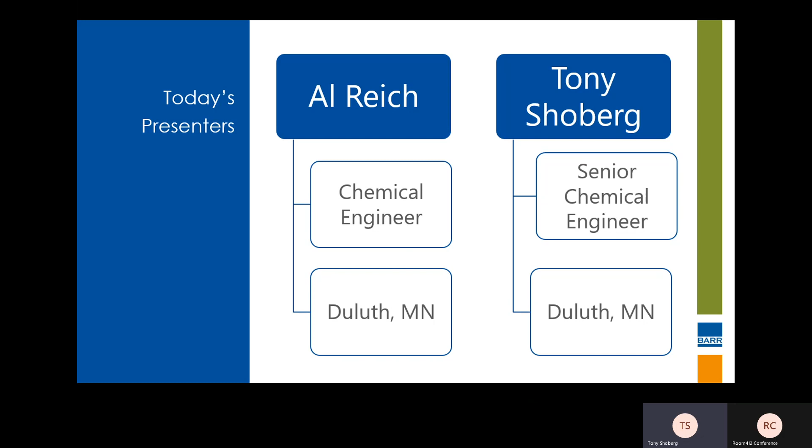Hey everybody, I've got a really similar story to Al, except I've been at it a few more years than he has. So looking forward to talking to you about tanks this afternoon.

Great, so enough about us. Since we've got a smaller group, I think it would be great if we could just do a quick round the horn of: what type of facilities do you work at? What type of experience do you have with tanks and air quality? Are you responsible for emission calculations? Do you have any specific items you're particularly curious in, just so we can kind of keep the boat pointed in a useful direction for everyone? Maybe we can work from this direction over.

Okay. Sure. Okay, awesome. Okay. All right, me too. Gary? Right, in the back? Okay, Kale says hi. Okay, and you sir, in the almost front row, quick intro, what are you involved in with air quality efforts with storage tanks, emission calculations, anything in general?

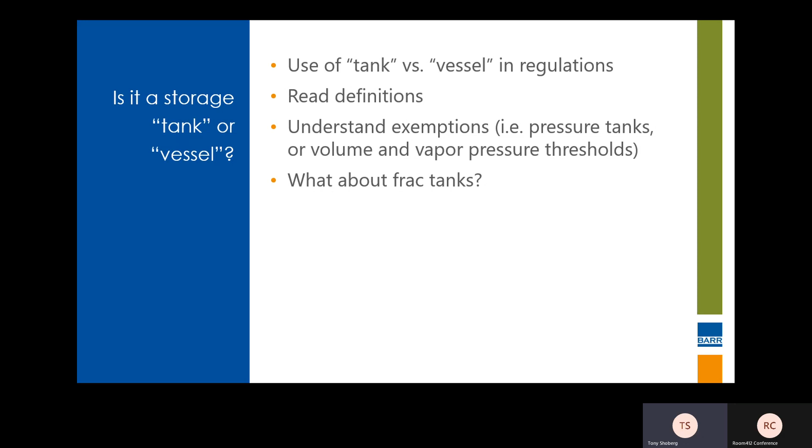I think one takeaway from here is the NSPS rules, particularly K, KA, and KB, universally apply, or potentially universally apply, regardless of what industry you're in. So that's going to be our focus when we're going through the regulations here. We're going to be talking a lot about KB, and the main thing to note is that some of these tangential or similar regulations are very similar with some slight differences, or they might refer to KB. So just something to keep in mind there. And Al, feel free to add anything as I'm going through as well.

You got it, Tony. Ready for the next slide.

So as I said, this goes into a little bit more detail about the common air regulations. So K, KA, and most importantly KB for volatile organic liquid storage, is one of the most common ones that we all have to deal with.

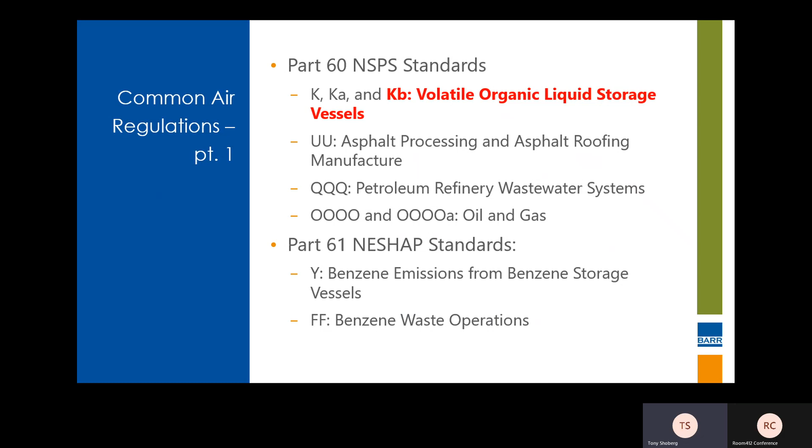Then on top of that, there's state regulations, and we just have tried to give a couple examples. This obviously is not an exhaustive list, but Illinois, for example, has Part 215 that applies to loading operations and storage operations. There's a separate Part 218 that applies specifically to the Chicago area. There's some other examples here. So the main point is, don't forget about your state regulations.

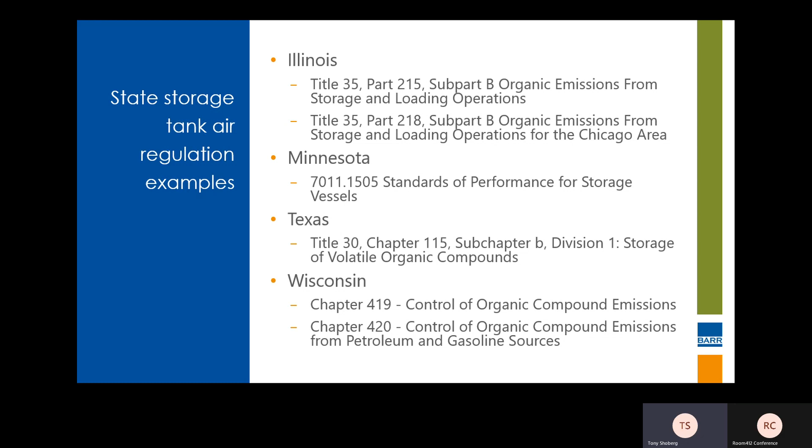So the structure of air regulations follows somewhat of a common pattern, where there's the applicability, definitions, and exemptions, which we talked about a little bit already, and it's important to go through those. Sometimes it's pretty obvious what you're subject to, but other times it's not, and it takes a more detailed look at the requirements. And then there's your actual standards, which might involve work practices, such as inspections, or if you have a fixed roof tank, it could be an actual emission limitation. Typically for floating roofs, those standards are work practices and not actually numerical emission limits.

Testing may be required. Inspections, again, might fall under that testing category. Monitoring of your operations to ensure that you're meeting any required standards, and of course record keeping. If you don't have records, then you basically didn't do it. And in some cases reporting is required. So most regulations have some element of each of those topics.

Starting out basic here, we'll get into some of the details. So KB applies to storage tanks that are constructed, modified, or reconstructed after July 23rd, 1984, and that have capacities greater than roughly 20,000 gallons.

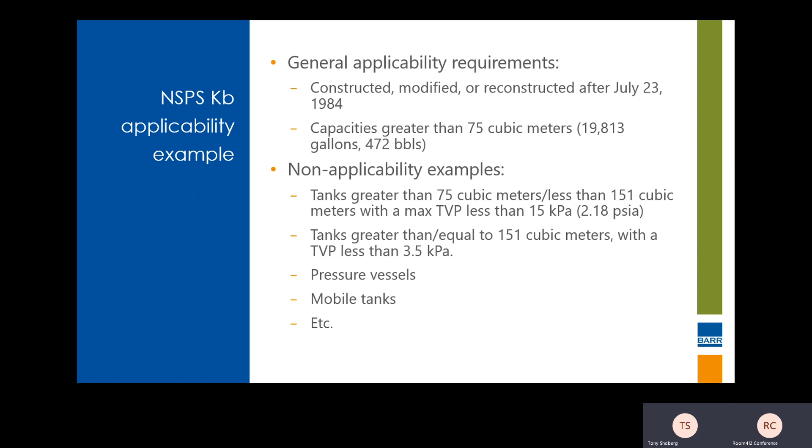Typically under KB and other rules, if you have a maximum true vapor pressure of greater than 11.1, that's going to require use of a closed vent system and controls. So that's usually the limit we're looking at for being able to store volatile organic liquids in a floating roof tank versus something that needs to be connected to a closed vent system and emission controls.

As far as I know, I haven't seen a floating roof tank successfully connected to a closed vent system and control system. I don't know if anybody in the room has experience with that kind of configuration, but there's some technical feasibility issues that typically preclude that combination from being used. There was a note that there might be one in Louisiana somewhere, but I think it generally seems to be uncommon. Yep.

Gary is noting that it may have come up through a LAER evaluation, which would make sense since it's typically uncommon. Yep, that makes sense.

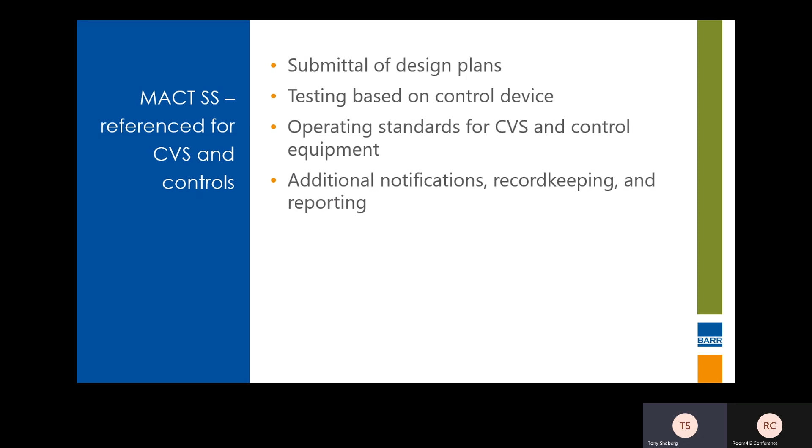So outside of actual regulations, there may be requirements for your storage tanks, such as from air permits. If you don't actually have a permit document, it might be like in Texas and some other states, a permit by rule or a general permit, where the permitting and rule are kind of combined into one thing.

Another source of tank requirements can be the Storage Tank Emission Reduction Partnership Program, also known as STERPP, which was a voluntary agreement, I believe, back in the early 2000s for operators with the EPA to reduce air emissions, primarily from slotted guide poles. They incorporated requirements there that are very similar from MACT WW. So basically what STERPP requires is no visible gaps on your slotted guide pole, and provides some very specific options for what controls you can use to meet this emission reduction program.

I'll pause there. Any questions or comments up till now?

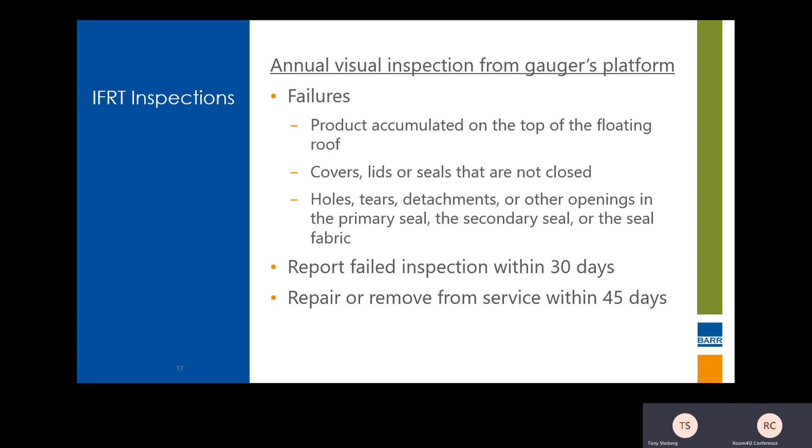This is another one where this complete out of service inspection might have some misunderstanding - I think we'll go into that in more detail later - but maintenance might think they're doing the inspection in accordance with API 653 and that they're covering everything they need to.

For this complete out of service inspection, more often, or almost always, it doesn't check all the boxes, so it typically is its own independent inspection. Under KB, the rule says it must be conducted out of service, but there recently was some language that allows you to request an alternative monitoring procedure. I think it's actually written into the rule now. I don't know if you actually have to request it, Al.

This slide is a precursor to the upcoming more detailed NSPS alternative compliance option. Historically, to request the AMP, for a while the EPA was granting them, and then they kind of pumped the brakes on it. But recently, early this year, the EPA published the final update to NSPS KB that has provisions to accept MACT WW as an alternative compliance option, and we'll touch on that in more detail as well.

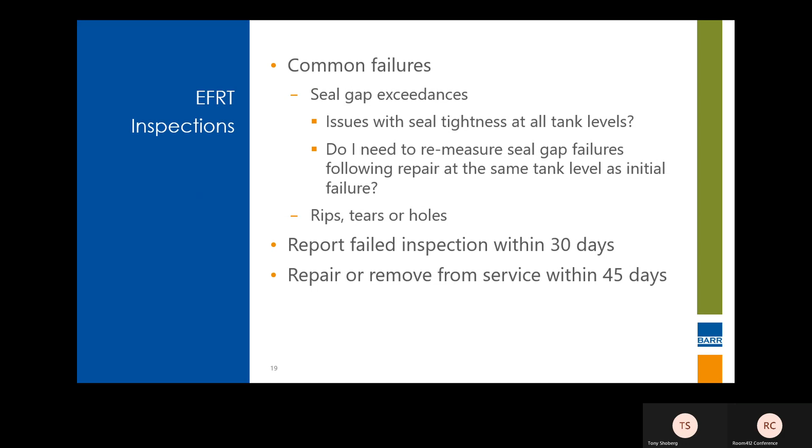Talked about this one already - it's pretty much the same as the IFRT, except that this inspection is required each time the vessel is emptied and degassed, not on a 10-year cycle.

You can go to the next slide.

So what happens if I change service in a tank to a product that is less than the applicability threshold to require inspections? For example, you have a floating roof tank storing gasoline, but you switch it over to diesel, which wouldn't trigger the vapor pressure threshold for KB applicability. However, if your permit still requires you to do it - if your permit incorporates the requirements of KB, not just by reference but the specific language from there - you must still do the inspections as if you were subject to the rule, regardless of the applicability.

If you no longer intend to store gasoline, you may need to do a permit action to remove that KB applicability - again, it all depends on what kind of permit you have. If it's a temporary event, you could continue the inspections as if you were subject to the rule. And if you don't have a permit and you no longer meet the applicability criteria, you may choose not to complete the inspections. It's kind of a risk-based decision, one of those gray areas, but if there's no underlying permit requirement and you don't meet the applicability criteria, it's probably pretty safe to no longer do those.

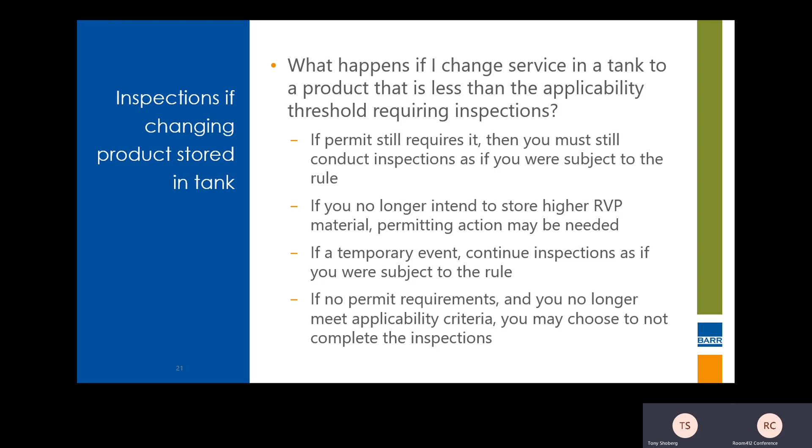All right, seems like a good spot for a quick pause. Questions, comments before we get into monitoring and record keeping? Appears to be nothing on the inspections at this time, Tony.

All right. So some of the basic monitoring requirements in record keeping.

One is you need to have a record showing the dimension of the storage vessel and an analysis showing the capacity, routine records of the material stored, the period of storage, and the maximum true vapor pressure during those respective storage periods. And there is a notification requirement under KB within 30 days if your maximum true vapor pressure exceeds the range that you're subject to.

So there's a variety of ways that you can determine your vapor pressure from your storage tanks. Do you have a question? Yeah, I was making sure I wasn't on mute there.

There was a note around exceeding the vapor pressure ranges, and that's in reference to not necessarily the 11.1 PSI threshold, which would be a deviation under most permit situations. However, this is specifically referring to the vapor pressure threshold range for those smaller, unique applicability categories. Yeah, the 0.5 to 3 point or point whatever. Yep.

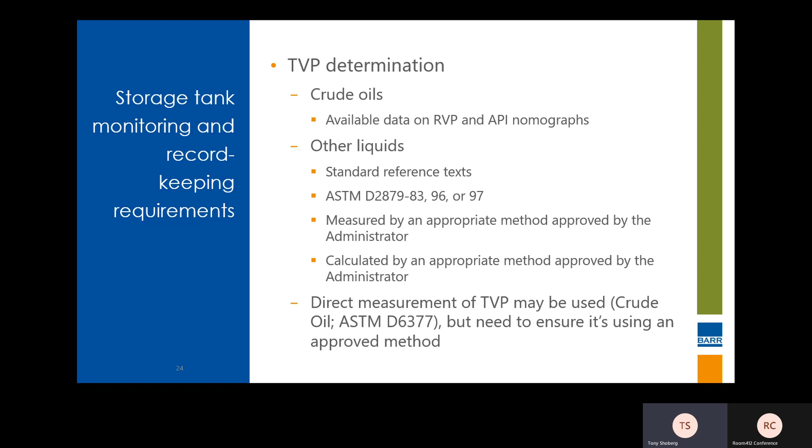If your maximum true vapor pressure is greater than 11.1, you need a closed vent system and control device. So a couple questions we've received: what if your TVP exceeds 11.1 for one day? For example, maybe you received stock that was warmer than normal, or some other extenuating circumstance resulted in your calculated TVP exceeding that. Our recommendation is to calculate a weighted average based on a weighted average TVP, and keep monitoring, but it's not necessarily a KB deviation unless the monthly average exceeds 11.1.

That's from a KB interpretation perspective, but some state or permit requirements may differ. So what if it exceeds 11.1 for an entire month? If it's a one-time exceedance, you may not have to install a closed vent system and control device, but it could be a Title V operating permit reportable deviation. However, if you expect that to continue, you probably will need to install that closed vent system and control device.

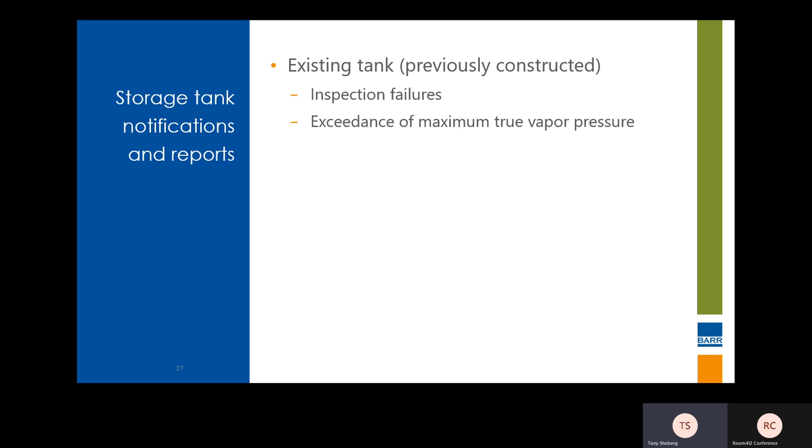For EFRs, seal gap inspection notification, seal gap inspection report. For IFRs, 30 days prior to fill, prior to your complete inspection, actual startup and certification for both. There's an actual startup and a certification that your control equipment meets the standards that's required 15 days after.

And then in some cases, if your permit requires it, you may need to submit notifications of changes to as-built information. And then, of course, there may be some state requirements that you need to consider as well.

If you have a modified tank or a reconstructed tank - and just as a reminder, modified is if you increase emissions on your tank, basically what it comes down to. And then a reconstructed tank is, regardless of emissions, did you spend 50% or more of what it would cost to construct a comparable new tank?

So if you triggered KB for one of those reasons, there's a reconstruction notification, which is required 30 days after reconstruction commences, a modification notification, which is 60 days or as soon as practicable before the change is commenced. So that's very vague.

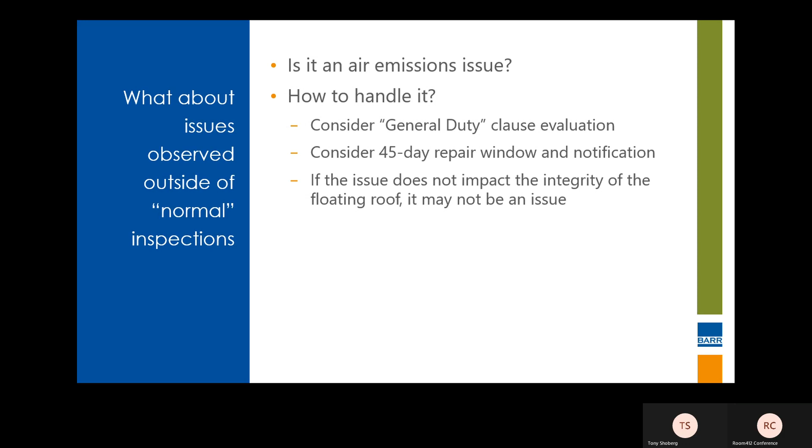Anybody in the audience have any thoughts on this one? Or perhaps you have a friend who has a terminal or a tank. Seems to be heads nodding, but no comments at the moment. Okay.

So just a couple notes about some additional tank regulatory programs. We touched on this previously. The benzene waste operation NESHAP under Part 61 may require a closed vent system and control, or NSPS KB level controls.

MACT CC for petroleum refineries gives you the option of WW or NSPS KB, and it specifically outlines what to do in each case. And then MACT 6B, which is the area source MACT for terminals, is again either KB or MACT WW.

Am I still going on this one? Yeah, you will. We'll just do one final check on the regulatory topics that we've covered. Any thoughts, comments, discussion before we kind of shift gears into a little bit more visual storage tank design coverage here?

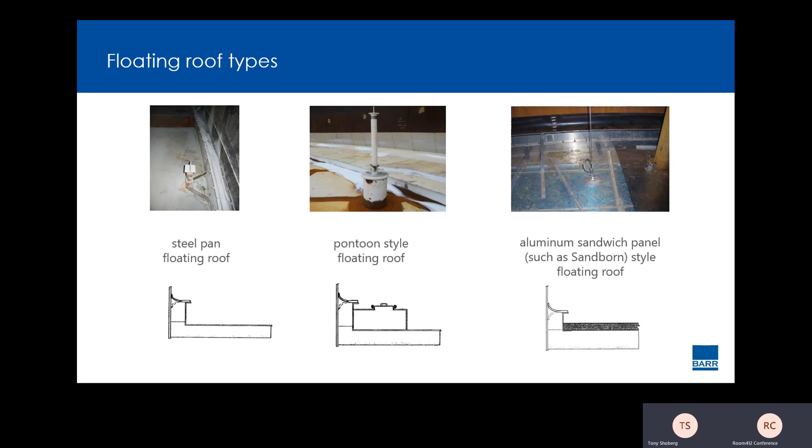Another common one for internal floating roofs is this aluminum skin and pontoon floating roof. So pontoons more in the sense of what you see on a pontoon boat. And so the liquid in this case is not in contact with the bottom of the floating roof, which is a distinction between other floating roof styles.

So there's always a vapor space between the liquid and the floating roof, whereas in the other ones we looked at, you can see in the middle diagram, the middle bottom, there's a line where it shows the liquid level under the seal, and you can see it's above the bottom of the floating roof. So the roof, well, the weight of the roof will push that level up, and it's always floating in contact with it.

So all this is important because these are parameters that go into emission calculations and/or have regulatory requirements associated with them.

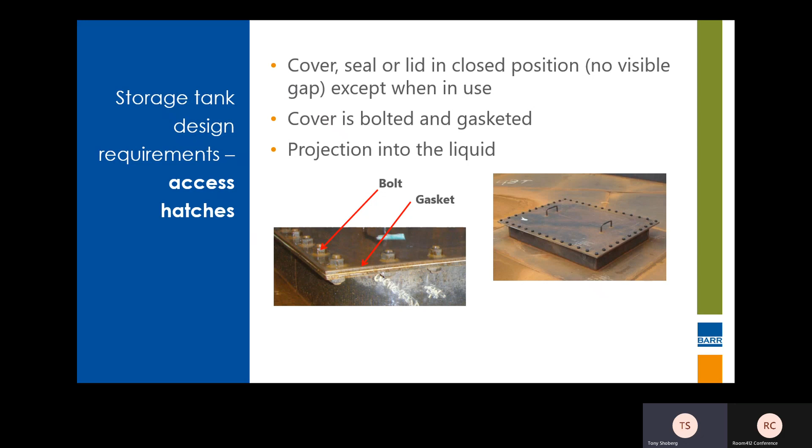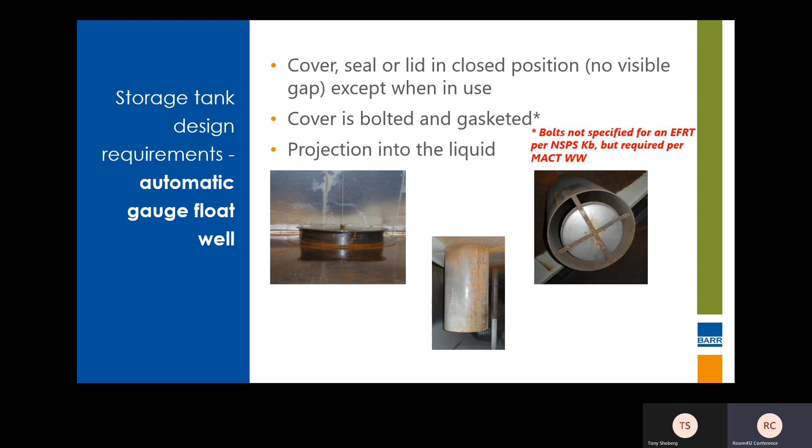Gauge hatches are used to take samples or do a bottom survey, for example. Again, same requirement to have that cover, lid, or seal in the closed position with no visible gap, except when you're using it, and that cover needs to be gasketed. In this case, you can see the gasket on the lid itself and also on that flange that connects the top part to the pipe that goes through the roof.

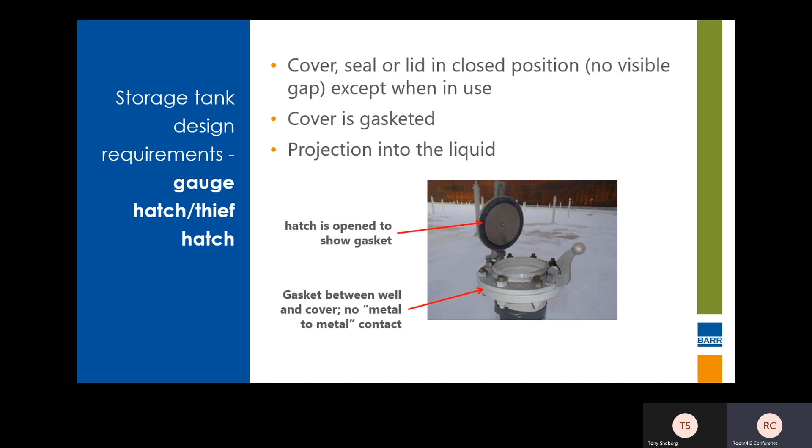Ladder wells are on fixed roof tanks, and again require a gasketed cover. Typically there's a wiper or some other piece of rubber there where that arrow is pointing to show that there's no visible gap. Sometimes the one leg of that ladder will also serve as a slotted guide pole. So they make these sleeves specific for ladder wells to meet the control requirements for a slotted guide pole or gauge pole.

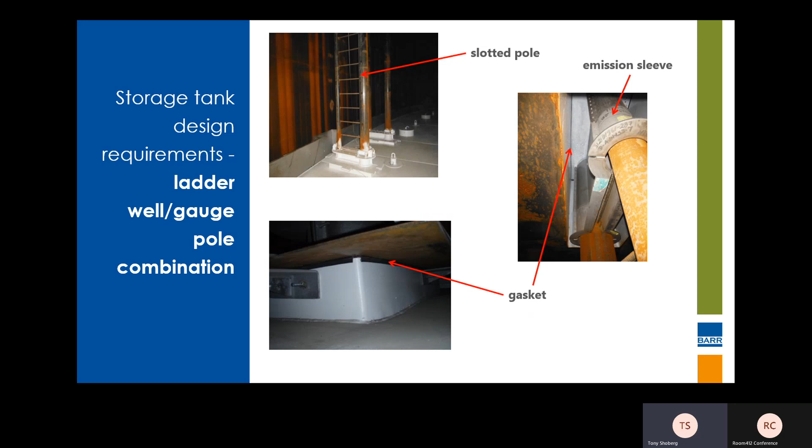Again, just some additional photos here of the gasket. Notably in that one lower left photo, you might argue that there's a bit of a gap between where the gasket comes together in the corner. Oh shoot, the projector isn't super great, so it's a little bit difficult to tell from the back. But as Tony's pointing out, we've mentioned the 1/8 inch gap provisions generally when we're talking about the other inspections, and I'd say that could be one to cause concern.

Sorry to take away somebody's opportunity for the bonus point. Let's go to the next slide here.

Rim vents are used to relieve the pressure between the seal and the roof. These are typically seen on older tanks; I don't see them specified or installed on newer tanks anymore. It gets a little tricky because some use a weighted pallet vacuum and pressure type configuration, shown in the lower right, so it's hard to tell whether it's gasketed or not. Sometimes you've got to look at vendor drawings or take it apart while the tank is out of service to verify compliance. So a lot of times they're just cutting these off and welding a patch over them instead of leaving them on.

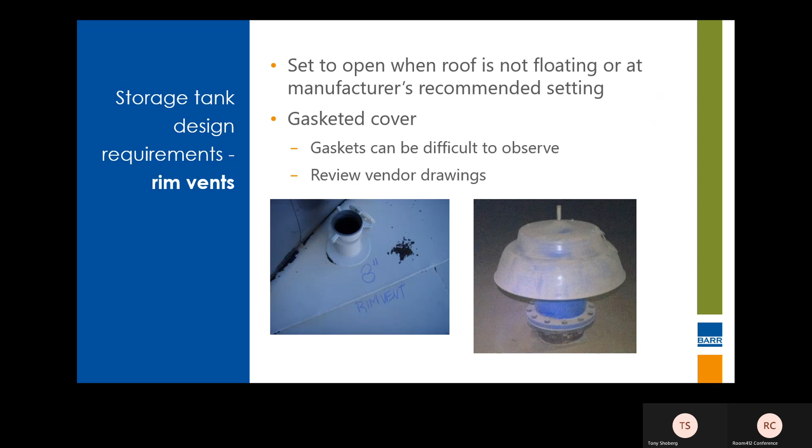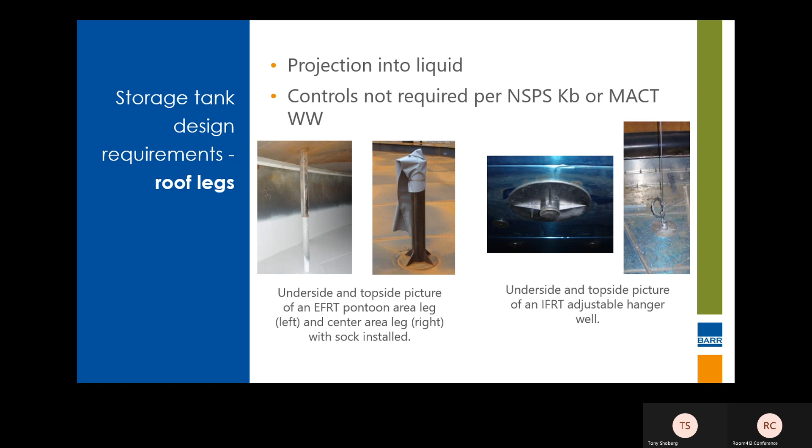So for a slotted guide pole, gauge pole, or anti-rotation pole, regardless of what function it serves, it requires a cover, seal, or lid in the closed position with no visible gap, and a wiper, either a sleeve or float. The cover needs to be gasketed. It has to have a projection in the liquid. It has to have a cover or cap on the top of the pole, way up at the gauger's platform, and often that is some kind of automatic gauge, like a radar gauge. If not, then there just needs to be some other kind of cap. It just can't be open.

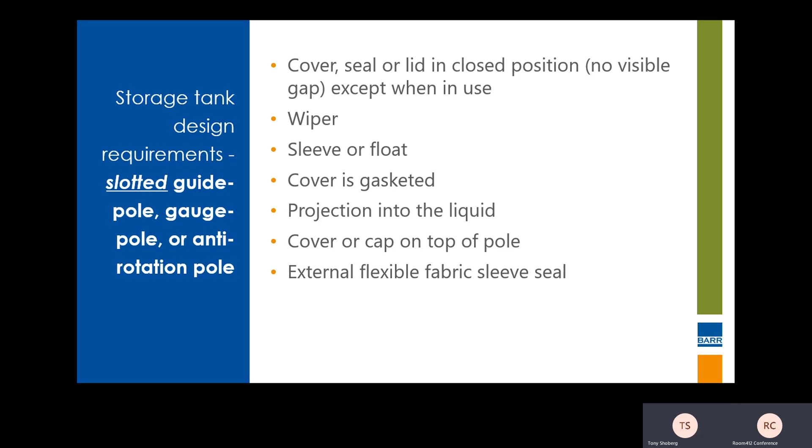I think this is just another up close picture of a wiper and a gasket and a slot, which in this case is a hole.

One thing to keep in mind if you're out inspecting a tank is that sometimes there might be holes or slots only below the floating roof, but then above the floating roof, there aren't any. So as long as they're not above the floating roof, that typically can be considered a solid gauge pole and not a slotted one. With the note that you should be cautious or conscious of your high and low leg settings to ensure that you don't look good from the inspection perspective, but then on your working bottoms have potential slot issues to deal with.

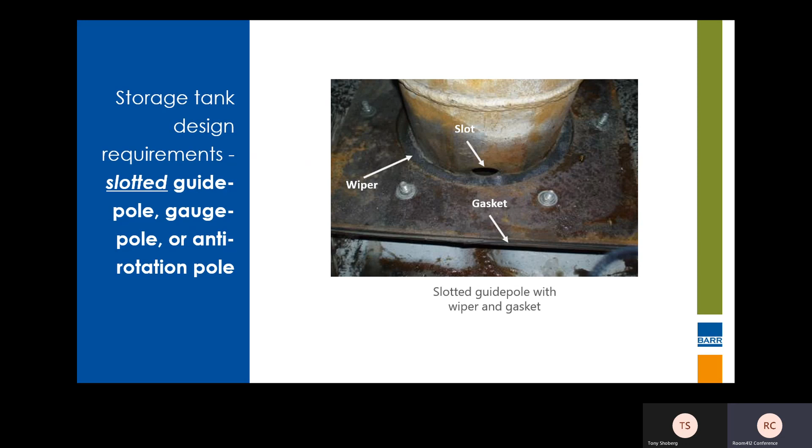Correct, yep. So to Tony's point, if for whatever reason your vendor started drilling holes, or they find that there's some benefit to having a few holes, you can still be an unslotted pole if you have holes in your pole. But if they can potentially be above your floating roof in operation, that's where we run into problems. Not problems, but it's just a slotted pole.

So stub drains are utilized on internal floating roofs for the purposes of, if you unintentionally get product on the top of your roof, there's several of these drilled throughout the tank. The little ping pong ball will float up and the liquid will go back into the tank instead of being on the floating roof.

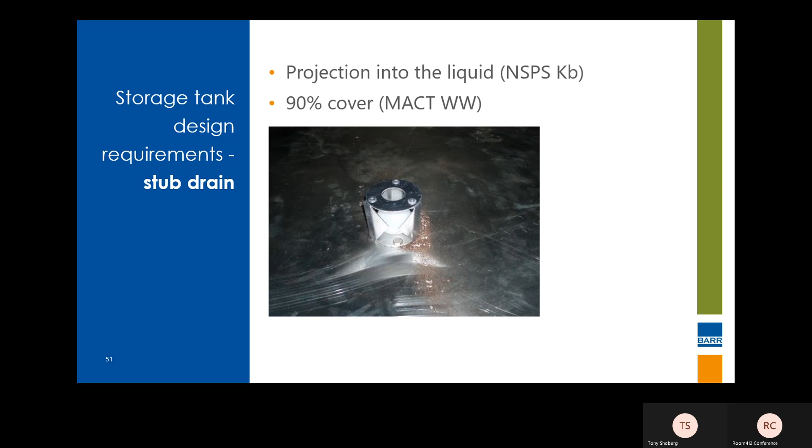I can take over from here, now that you've got through the visual portion of the presentation here. Sounds good. All right, so we've just covered the general overview of floating roof design, deck fitting requirements, and general floating roof parameters.

What are we going to do with them? Why are they important? What do we need to do with those? It's important for a variety of reasons to approach this from a significant data management perspective, because we want to have accurate representations of what our tanks are designed as, how they're built or constructed, and what's on them - not just from the emission calculation perspective that we'll get into in a bit, but also more directly from the regulatory compliance perspective.

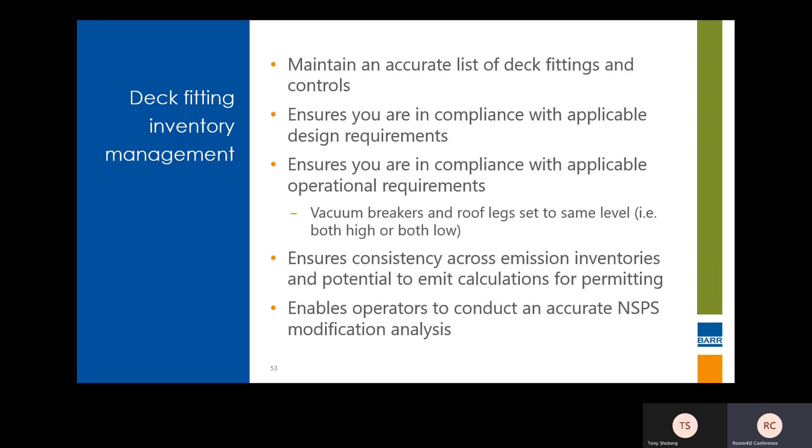So that to be said, we've covered the floating roof deck fittings in significant detail. Now we'll look at storage tank compliance requirements for fixed roof tanks with closed vent systems. Not a lot to cover here - we're going to keep it focused on storage tanks, but we don't want to miss discussing the fact that these closed vent systems are designed to collect the vapors and gases being emitted from those tanks and route them to a control device, preventing them from escaping to the atmosphere before they get combusted.

And from the NSPS KB perspective, we want to have no detectable leaks above 500 ppm and look for a VOC reduction of 95% or greater for whatever type of control device you're using at the tail end of that closed vent system.

So then we've talked about design requirements. We'll get to storage tank operational requirements here to talk about some additional elements from NSPS KB as it relates to these storage tanks.

One of the big questions that comes up quite often is the rule states the process of filling, emptying, or refilling shall be continuous and shall be accomplished as rapidly as possible. Unlike other regulatory definitions, we don't have a lot of clarity or specific guidance on what that means. So a common question is, what does continuous mean?

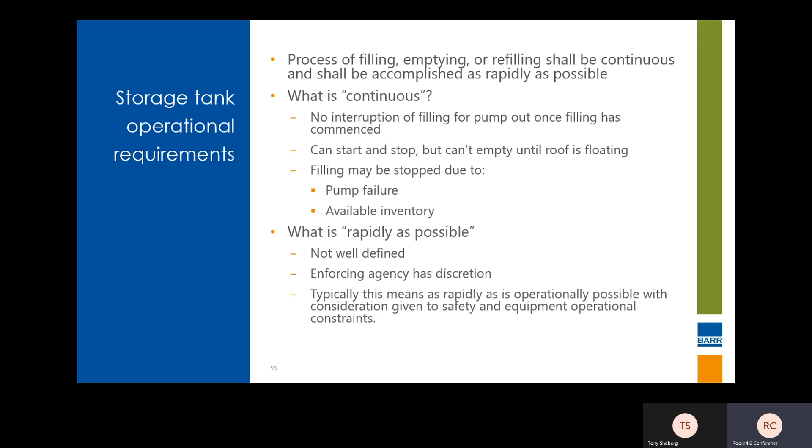Yeah, if you had to trickle fill it, I would argue that you may want to, from a filling perspective, evaluate if you can batch it to a slightly more tighter time frame. But essentially, you have to account for your emissions and do it in a way that you can defend as being continuous and rapid.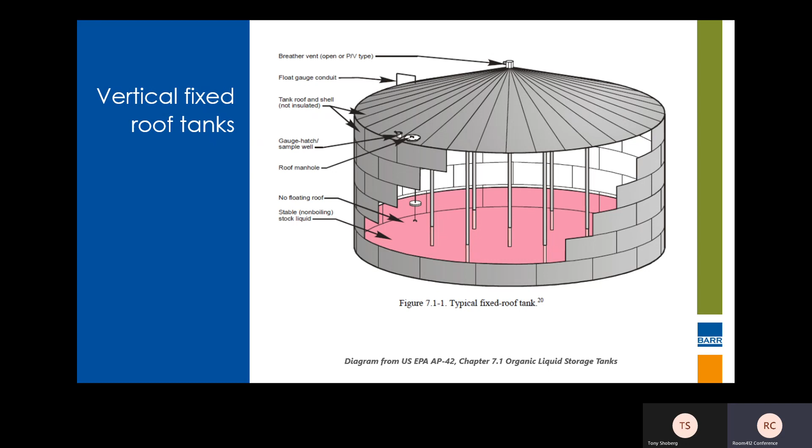For the floating roof tanks, unlike the fixed roof tanks where we have just a function of liquid going into the tank and being in the tank, our floating roof tank emissions are driven by a number of sources. We have impacts from the rim seal, impacts from the deck fittings, potentially impacts from the floating roof itself if it's not welded, in addition to the withdrawal losses as that roof moves up and down.

And then, of course, we haven't fully distinguished between an internal versus an external floating roof tank, but as Tony noted earlier on, the internal floating roof tank type simply is a combination fixed roof and floating roof, and that fixed roof eliminates the wind effects and therefore can theoretically result in a tank that has lower emissions than an external floating roof tank.

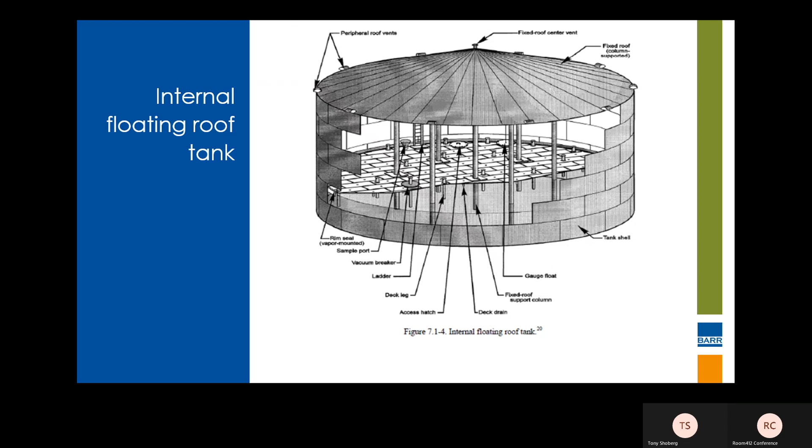So from an emission calculation perspective, there's sort of a general hierarchy or perhaps path to get to where we are today. If you want to refer to it as primary sources of the calculations we are most familiar with, it started back in the API MPMS, Manual of Petroleum Measurement Standards, Chapter 19, and this has all of the nitty-gritty background details in terms of where these calculations were derived from, the empirical data and all that.

Unfortunately, they're not publicly available. They're not super expensive, but they're sometimes a challenge to get, especially if you're just trying to find one tiny piece of information. To that point, they have been used as one of the primary developmental tools to get us to Chapter 7, Section 7.1, Organic Liquid Storage Tanks, in the EPA's free and widely available AP 42 guidance document for emission calculations. And so a lot of what is in AP 42 is simply distilled down from the API MPMS documents and publicly available, and what all of our regulators use and what we use to play ball with for the most part in terms of emission calculations. It's the official reference source of tank calculations by most agencies, and it's really what the states and EPA expect to see when we're talking about tank emission calculations.

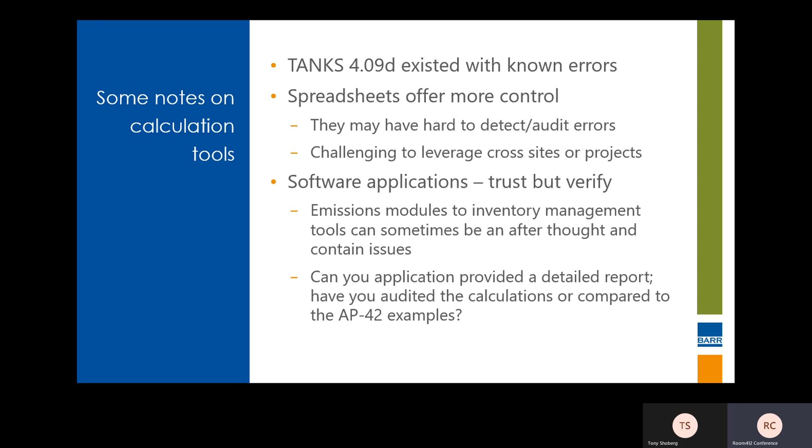If you're not able to easily answer those, that can be a bit of a concern. In AP 42 itself, they say you can use spreadsheets or software applications, but make sure you trust, test, and verify them, because we're not going to certify or approve anything. I'd be cautious if anybody says they have an EPA certified or approved tool, because effectively there shouldn't be or isn't one. Not to say it's not correct, but something to be aware of. So again, can you work examples by hand and get comparable answers? Just some notes on calculations.

So again, we're talking specifically about AP 42, chapter 7.1. We want to use tools that accurately apply the equations, whether it's a spreadsheet or a program. The updates were published, if you've been following along, initially in November of 2019, and then there was a final publication in June of 2020, which really just incorporated a few administrative clerical updates, not anything of technical substance. That was really captured mostly in the 2019 update.

This included a lot of changes to the temperature equations, for our liquid surface temperature and our bulk liquid temperature. That's really where the most substantial change occurred, in how those equations went from assuming a shell height over diameter ratio to a tank-specific shell height over diameter ratio, which is good because it's more accurate and there's some advantage to it, but it also creates added complexity in the calculation methodology. If you're doing it by hand, you run into making sure you've organized your calculations and aligned them correctly with the type of tank you have for the emissions you're trying to calculate.

The other challenging bottom line is the change to AP 42, the pile of new equations, doesn't appreciably change the bottom line. I think we see, give or take, about 5% one way or another in emissions change, which is not nothing, but it's also not typically enough to put somebody in a different source category. But it's also just enough to be substantial enough where we have to go through the effort of making sure we've got our numbers accurate and calculated correctly.

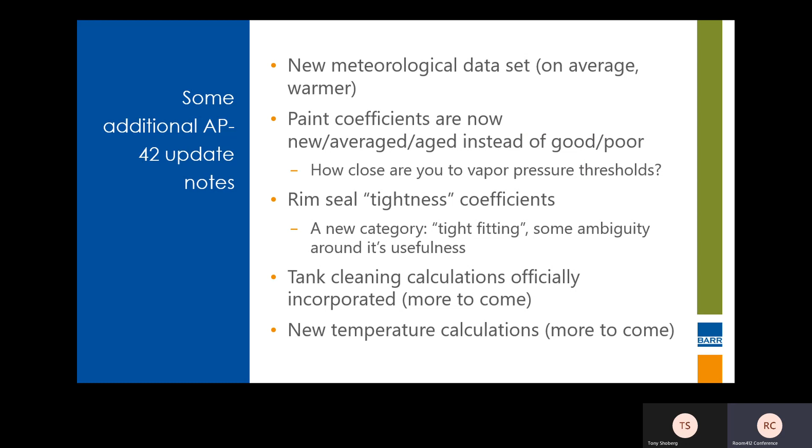So we've touched on the tank cleaning stuff already, and then we've got the tank calculation, or the temperature calculations, which we'll dive into in a bit here as well. So we'll start with fixed roof tanks. We've got working losses, standing losses—that gives us our routine fixed roof emissions. Relatively straightforward to start here.

So now, it's the afternoon, we've all had lunch. I have a select number of equations to dive into. Again, Gary, this is beyond the basics—we've got to climb up a little bit here. I don't have every single equation from AP 42, and I don't think we need to go into express detail, but to appreciate some of the new calculation changes, and understand a bit more of all the stuff Tony covered beforehand, we'll dive into a few formulas here to get a better perspective of what that looks like.

So, the fixed roof standing losses are a function of the material in the tank—whether it's a tank that's constantly turning over or just sitting halfway full for a month. We have an equation based on the number of days that the tank is effectively in service for that period of time. And then there's a number of factors and coefficients that go into determining what that evaporative breathing standing loss is from the tank.

So whether the temperature cycle is influenced by the diurnal temperature change, the day to night heating and cooling, or you have a heated tank that experiences temperature cycles as vapor pressure increases by whatever method you're heating the tank, or the tank is being passively heated, we're calculating the density of the vapor, the amount of vapor in the tank, the expansion factor, which is effectively how much gets pushed out, and how saturated that pushed out vapor is. Typically we look at it on a number of days, but in heated or insulated tanks, that number of days becomes more so the number of heating cycles.

So if you have a fully insulated tank, you're insulated from the ambient temperature impacts, and you then have to rely on how many heating cycles your tank goes through, and that drives your cyclical temperature evaporative losses from the tank.

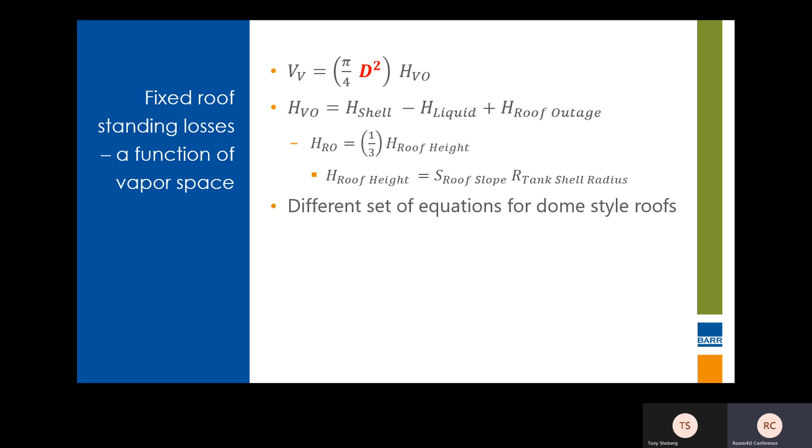Horizontal tanks, right? When we talk about fixed roof tanks, I almost always default to thinking about an upright cylinder, traditional fixed roof tank like the figure we had a few slides ago. However, for a horizontal fixed roof tank, HFRT, we do have to do a couple manipulations to the calculations to get that to work correctly.

So when we get information on a horizontal fixed roof tank, we're typically given the length of the tank and the cross-sectional diameter, which is useful in most regards. However, from an emission calculation perspective, we have to essentially reorient that given diameter and length to the effective length and diameter to turn our cylinder tank on its side to an equivalent vertical tank of that size.

So we're doing some geometric manipulation to get an equivalent diameter and height to use for those horizontal calculations. Then for a horizontal tank, the DE, effective diameter, and HE, effective height, get used in place of diameter and height in all of the other fixed roof calculations.

So the vapor space expansion factor is another equation, I don't want to say popular or exciting, but it's one that has several different iterations in AP42 that range from very complex to, if you have no other information, you can assume KE is 0.04.

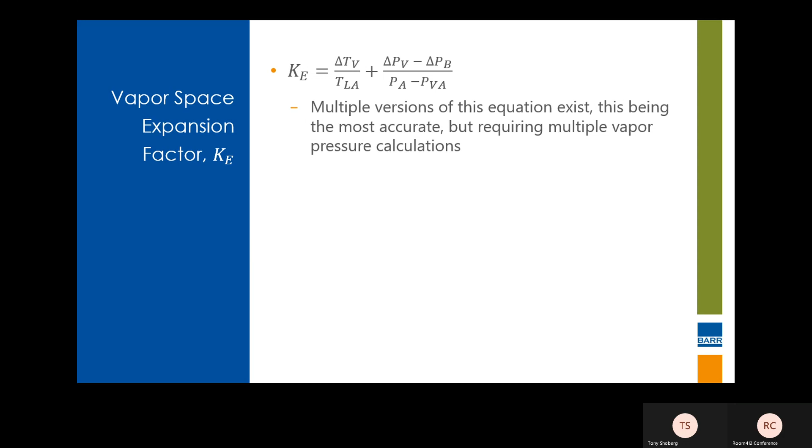So here we end up with TV, the vapor temperature range, a key variable here, and this is the new representation in AP42 for the daily average vapor temperature. It's a lot, but it's driven by the fact that we look at the impact of the tank shell ratio, or tank height over diameter ratio, and that allows for a more accurate representation of the thermodynamics that are impacting the tank.

So again, it's more accurate, which is better, but it also is more work to get set up right, especially if you're trying to create something from scratch. The old AP42 relied on a default HS over D ratio of 0.5, which industry-wide as an average is not unreasonable, but if you're at either end of the spectrum, there's going to be some winners and losers.

But this again is a beginning kind of dive into it. We're also looking at the solar absorption of the roof and the solar absorption of the shell, and all that works into the overall equation. So then this is for an atmospheric tank.

If we partially insulate the tank, suddenly it becomes significantly easier, and we have just some theoretical thermodynamic heating impacts from the solar gain through the roof. If we have a fully insulated tank, like I was saying earlier, that goes to zero, and we end up having to rely on the temperature cycling from the calculations, or from the heating cycles.

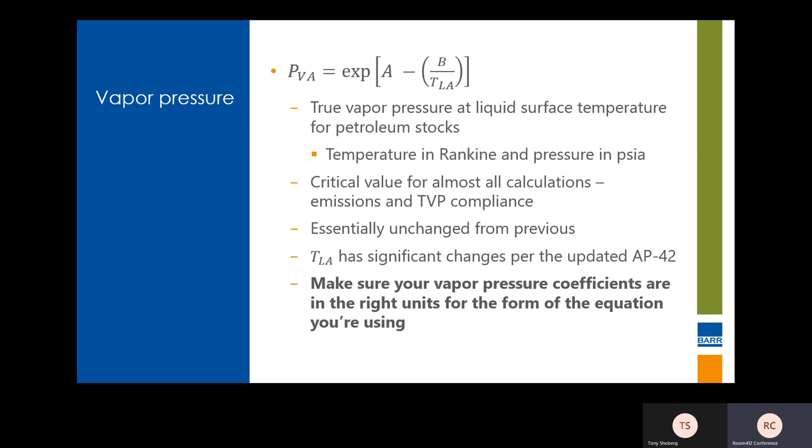Again, what we're doing, and the way that it perhaps makes a little more sense, is instead of relying on default coefficients, we are able to specifically calculate them now per the tank that we have, which can generally be a good thing.

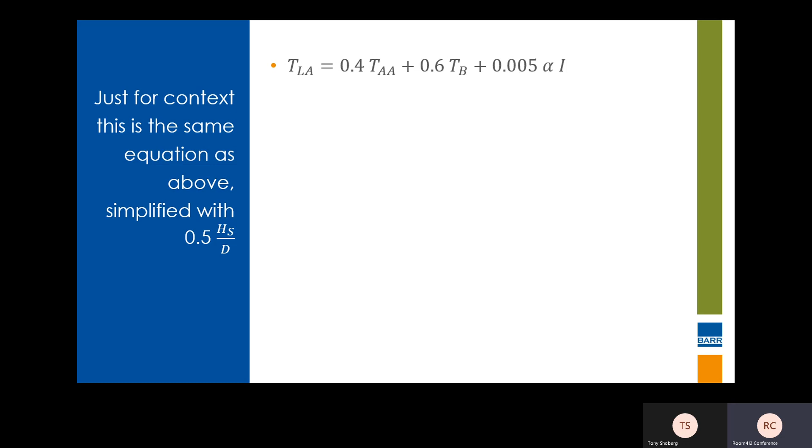So we've been, up until this point, talking about the liquid surface temperature, which is a bit of an abstraction and probably worth another slide or two. If you've ever had to have detailed conversations with your product group or anybody else on potential concerns about vapor pressure exceedances, talking in liquid surface temperature can be challenging because it's potentially a bit of an abstract concept to groups outside of the environmental side for tank calculations.

Most of the time, when we're talking about tank temperatures, everybody defaults to the bulk liquid temperature, or the average temperature of the stuff in your tank. That's what we'll get into in a second, but it's important to know that when we're dealing with vapor pressure calculations, we're looking at the liquid surface temperature, which is that interface between the liquid and the atmosphere, or the liquid and the roof. And that can typically be a little bit cooler than your bulk liquid temperature.

But you need to temper that with saying, oh, we actually have a little more room on temperature, because they can kind of go crazy and run with that and think, oh, we can run the tanks hotter now, or things like that.

So there's a little bit of a strategy involved in managing temperature, especially when you're talking to groups outside of the environmental realm.

Okay, so bulk liquid temperature. This is a little easier, right? If you can measure it, use that. That's the easy bottom line, make it simple. You probably have, or your clients probably have, thermocouples in the tank. Get the average temperature for the tank for the month. There is your bulk liquid temperature. Otherwise, for uninsulated fixed roof tanks, it's a pretty simple calculation. But again, if you've got measured temperature for the bulk liquid, it just makes sense to use that.

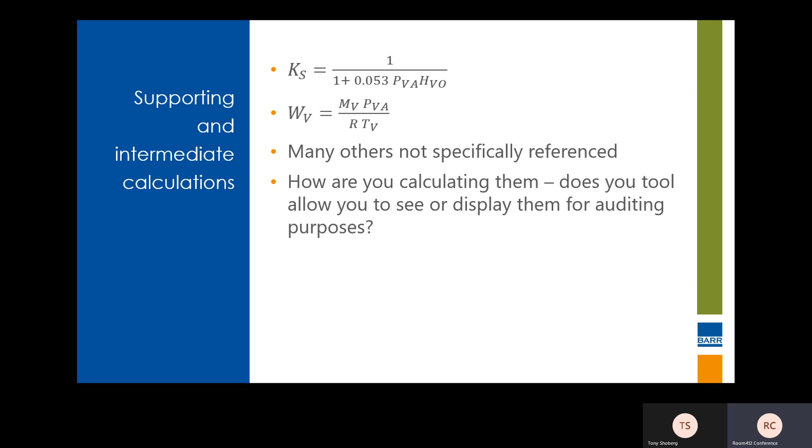We're not going to go through all of the calculations, but it comes down to someone who may be responsible for air calculations or overseeing people doing air calculations - how do you have confidence or accuracy in making sure that from start to finish everything is being done correctly? A software model or something that's locked down is a lot easier to audit or understand if you just have to worry about the inputs and the outputs, and you know that your intermediate steps along the way are okay. But again, just some considerations there.

So then we'll shift gears to the working loss angle now. The standing losses are driven purely by stuff being in the tank, being affected by the ambient temperature acting on it, or heated by heaters. For working losses, this is going to be primarily driven by throughput.

For a fixed roof tank, we have liquid going into a tank. That liquid going into the tank raises the liquid level, displaces the vapor above it, and we have emissions generated from that rise in the liquid level. When you empty the tank, you pull the liquid level down, it draws in fresh air. There's no emissions associated with that activity.

So again, we have the primary factor - what's our throughput driving that liquid level change? And then we have some turnover factors, some product factors, vent setting correction factors, all of these to dial in the accuracy of the amount of vapors being expelled from the tank.

From an important concept perspective, how are you calculating or quantifying throughput? The best way to do it is to rely on level data to get your actual liquid movement to then calculate throughput from that. When we look at tanks over time, throughput in typically equals throughput out. But if you're looking at really only a monthly calculation for fixed roof tanks, we really want to be interested in the throughput going into the tank because that is associated with the liquid level increase.

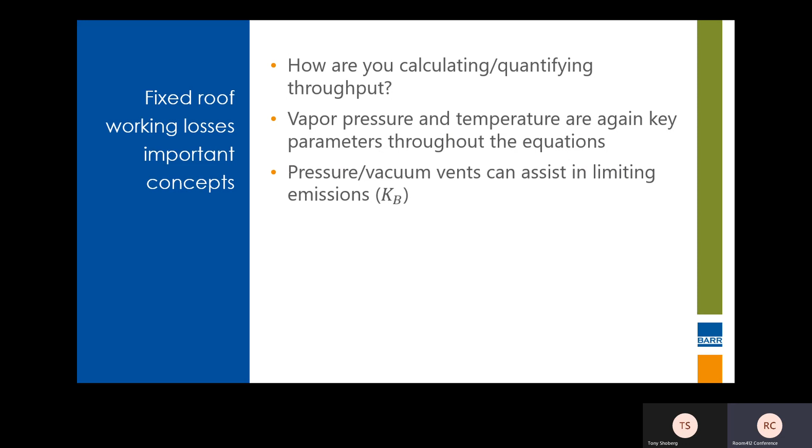So now that's the overview of fixed roof tanks. We'll now shift gears into the floating roof tank world. And very similarly, I think we've used working losses and withdrawal losses somewhat interchangeably, the same with standing and breathing losses. The old AP42 had generally used those terms interchangeably as well, but really when we're looking at total emissions from a tank, there's the working component, whether it's fixed or floating roof, and the standing component, whether it's a fixed or floating roof tank, and there's some differences now that we'll dive into on these tanks.

So for the withdrawal losses from the floating roof tank - and I use withdrawal losses here purposely - because unlike the fixed roof tanks we were just talking about, with a floating roof tank, the throughput that we're most interested in from a withdrawal loss or working loss calculation is the outbound throughput, or throughput associated with a reduction in the liquid level and a reduction in the floating roof height. So as you pump oil or gas or what have you into a floating roof tank, you're raising up the liquid level and covering up the interior shell of the tank.

As you pump liquid out of the tank, you're lowering that floating roof and exposing a thin film of material on the inside of the tank that evaporates. That is the effective loss method for withdrawal working losses for a floating roof tank. Whereas on a fixed roof tank, our working loss method is displacement of vapor space with an increase in liquid level.

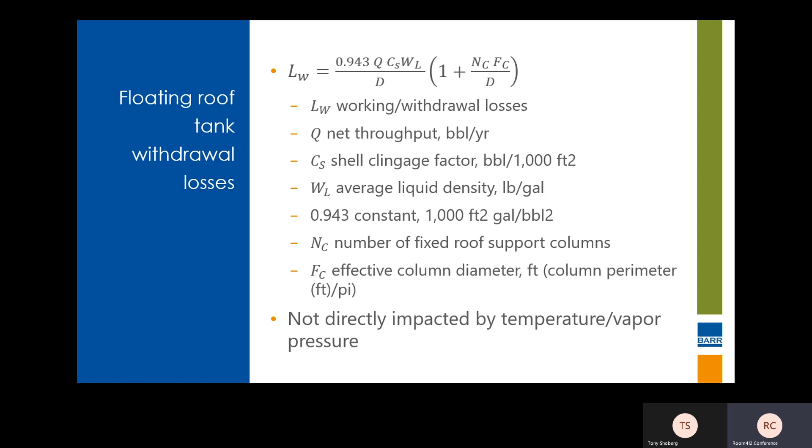So again, from the withdrawal loss perspective, we're really concerned about throughput and density. Obviously, the size of the tank is important, but once you build the tank, you can't do too much with that, at least as far as I've seen. And then, of course, the number of fixed roof support columns, should you have them, will also impact your emissions.

So then we shift to the standing or breathing component of floating roof tank calculations, and we end up with a slightly different ballgame compared to the fixed roof tanks, because we have 3 components that make up our standing losses: the deck fittings, the rim seal, and the deck seam losses.

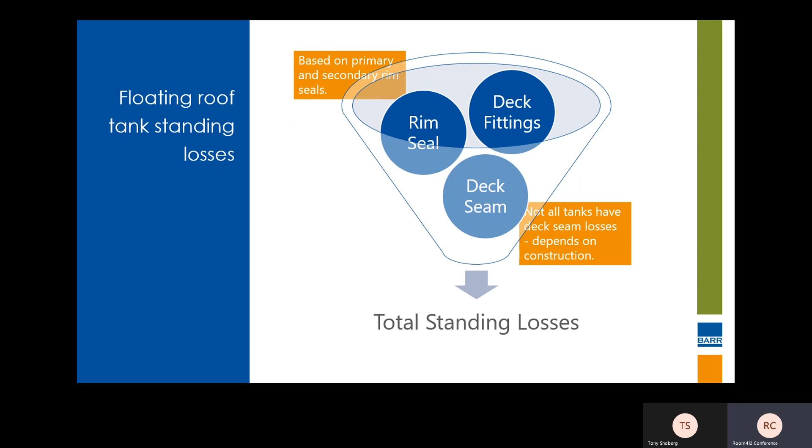And the rim seal is based on whether we have a primary or secondary seal. And then the deck seam losses are based on whether your floating roof is welded, or bolted, or some other way not fully sealed.

So from a deck fitting loss perspective, all the things that Tony and I talked through at the beginning of the presentation in that deck fitting section effectively have an emission factor calculated. So whether you have an access hatch or a roof leg or a vacuum breaker, each one of those you effectively have to go through to determine the total deck fitting loss per month based on the number of deck fittings in each group and the emission factor associated with those deck fittings.

And it's not just one factor to one deck fitting, it's based on the vapor pressure, stored material, and vapor molecular weight of the material in your tank. So it's not overly complicated calculations, but it becomes challenging in the repetition to calculate your emission factors for all of your deck fittings for your entire tank, and then making sure, if you're so bold as to set up your own calculation tool, that you do something in a way that allows you to repeat this calculation accurately and quickly.

So from that deck fitting loss, the total deck fitting loss is based on the total number of deck fittings, the vapor pressure of the stored material, and a product factor. We then have to calculate the individual loss factors per deck fitting per type.

And this is the first area where we see an impact of whether you're a fixed roof, or an internal floating roof tank, or an external floating roof tank. We see in the KV factor there's kind of 2 main parts to the equation, and this second part here is the wind-driven effects component. If you have a covered roof tank, that effectively goes to 0.

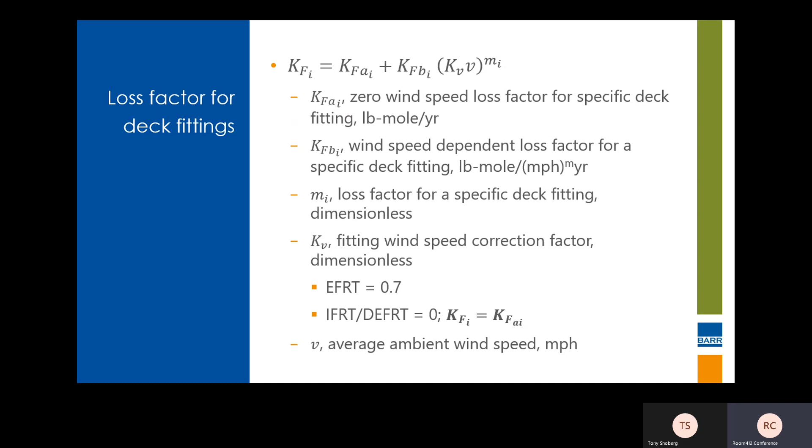Again, not to go through all this, but effectively for each deck fitting, we calculate an emission factor that feeds into the overall deck fitting emission factor calculation.

But you want to be careful in using it beyond preliminary screening purposes, because the estimated deck fittings in AP42 based on the size of your tank are based on average vendor information, and certainly may vary from the folks that you're using to help design and build a tank.

So it's a good kind of benchmark to do some rough calcs. But if you're into the actual permitting stage, you really don't want to be relying on default deck fittings, default anything really today. There's a lot of challenges that can come with that.

So as we're talking about deck fitting losses to kind of close out, again, the stored product and temperature are going to influence the vapor pressure. Having an accurate deck fitting inventory - we talk about that a lot in this presentation, but here's another instance of where that shows up in terms of what are your deck fitting impacts going to be, and do you have the correct controls represented in your counts?

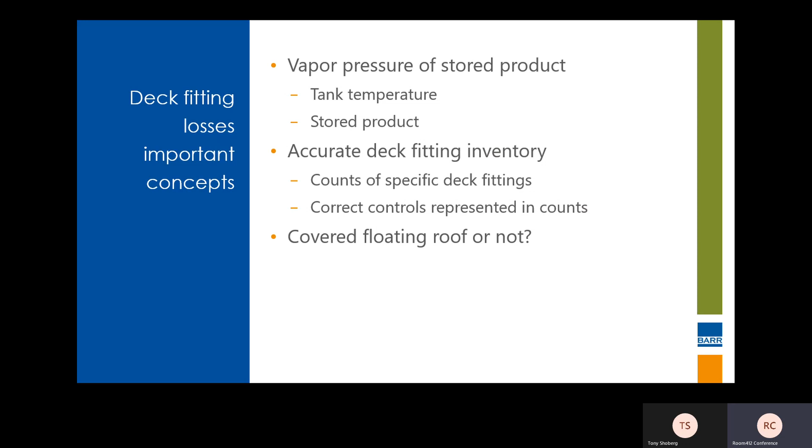So then we'll jump to the rim seal losses as kind of the next evolution of emission calculations for floating roof tanks. Similar to the deck fittings, based on the type and style of seals, we have certain parameters, and then it's just a function of the diameter of the tank, the vapor pressure, molecular weight, and a specific product factor. So we're looking at what's the type of rim seals that we have, what is the vapor pressure and chemical properties of the stuff that we're storing, and how will that impact the bottom line of our emissions.

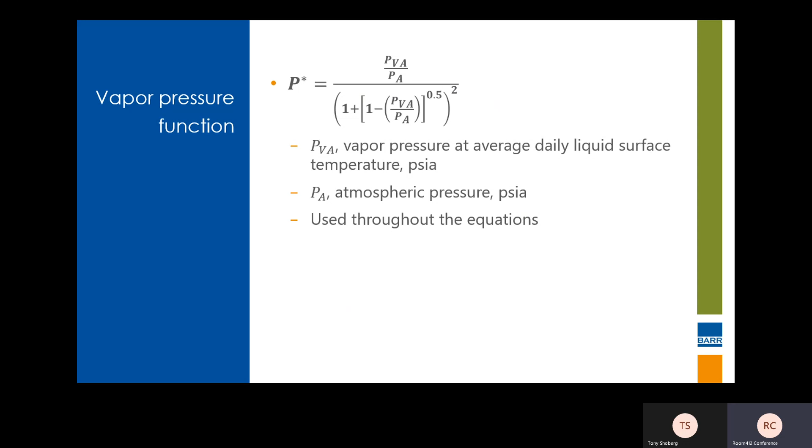One other equation that showed up in these recent equations is the vapor pressure function, which is a relationship between the atmospheric pressure and the true vapor pressure at the liquid surface temperature of our stored material. Just expanding on it here, it's used throughout the equations. From an ideal gas law perspective, it's used to develop that relationship and then support the evaporative loss calculations for the deck fittings or rim seals or what have you.

Very curiously, there's a pretty significant flip-flop between the weight of your ambient temperature to the weight of your bulk temperature. This can be another scenario where you run into experiencing a significant change from old AP42 to new AP42 in how your emissions or vapor pressure is going to shake out. From an emission perspective it'll have an impact, but where we've seen it most shockingly was in the TVP calculations for demonstration, where suddenly we had tanks that were really pushing the envelope for TVP compliance.

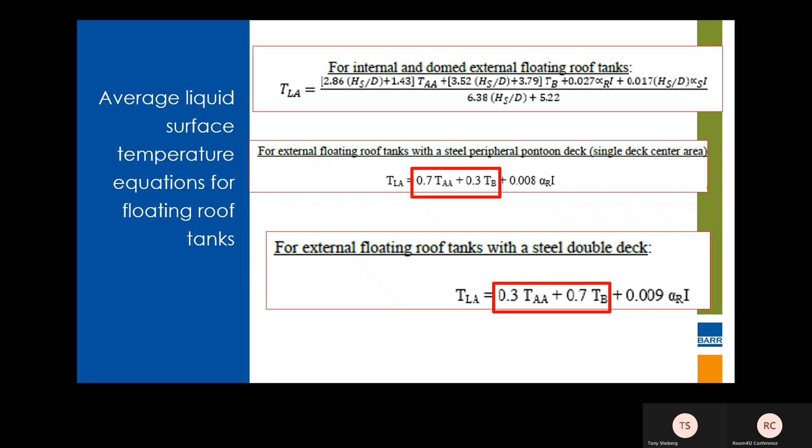So I think we've already hit this, bulk liquid temperature - measure it if you can. Otherwise, there's another family of equations similar to these that go through how to correlate your bulk liquid temperature, or how to correlate ambient temperatures to bulk liquid temperatures. So essentially, you're working backwards from equations like this.

The other concern here is, if you're receiving hot stock, we don't often see fully insulated floating roof tanks. We do, however, often see floating roof tanks that are receiving hot stock or material coming through a pipeline that has experienced thermal gain through high pipeline rates, or material coming off a process unit. You may not really be an ambient tank because of that elevated temperature material coming into the tank, and depending on how quickly it leaves the tank.

By using measured bulk temperatures, you completely remove the ambiguity there and have your bulk liquid temperature. But if you're relying on the AP42 algorithmic equation to go from ambient temperature to bulk liquid temperature, there needs to be some confirmation that you're actually an ambient tank and not just inadvertently, unknowingly, storing higher temperature material.

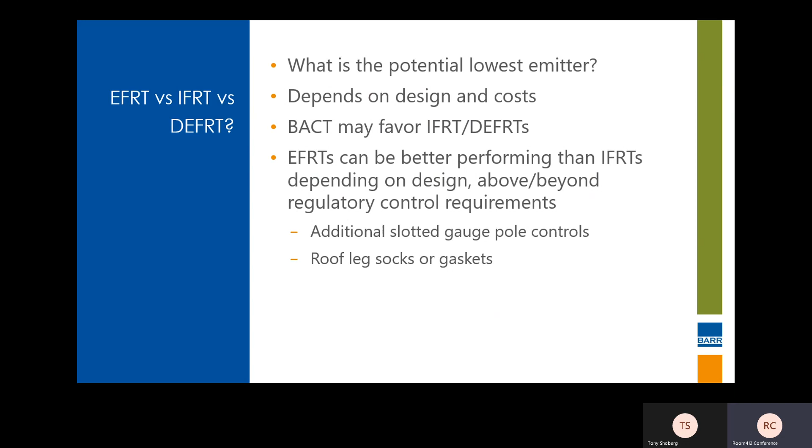Depending on the rim seal configurations, the deck fitting controls, the size of the tank, the number of fixed roof support columns, the number of roof legs, and all those factors we talked about, BACT may favor covered floating roof tanks. However, depending on the stored material, the project, and the availability of flexibility in design, there could be scenarios where you have better performing EFRTs as well. So if you don't want to necessarily go down the covered floating roof tank route, you may have some options to consider beyond just the floating roof or the covered floating roof tank.

I think Tony noted this at the top of the discussion. Flashing emissions are another category. Typically, we see those from unstabilized crude oil in the upstream industry. By the time we get to the tanks and terminals we've been talking about, though, that has either

flashed off, been weathered, been processed, or we're dealing with refined products. AP42 itself doesn't deal with flashing losses. If you have unstable material that's boiling or volatile, there are other process simulators and sample analyses you can run to better account for those emissions beyond the equations we've just been talking through, because those certainly will not cover those.

So that is the routine section of emissions. I'm going to stop to catch my breath for a moment. Any questions quick on that before we press on into the non-routine elements here? All right.

Hey, Tony, did I miss anything, or everything sounded good from your end? Nothing's coming.

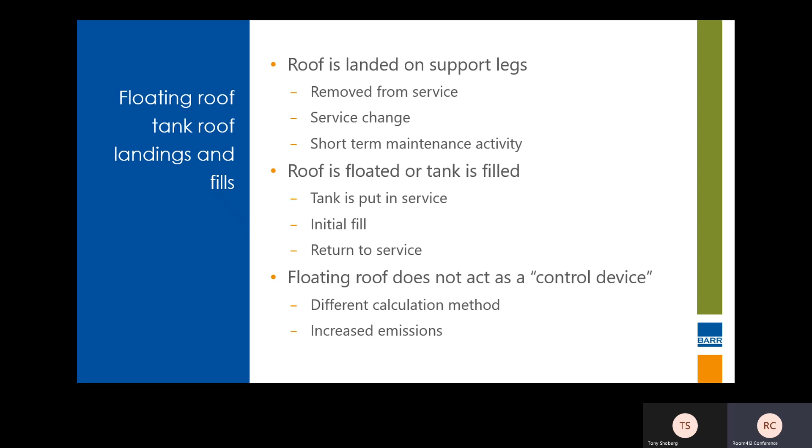So we'll start with the floating roof calculations for landing events. Whether a tank is landed on its legs or floated, we have different emission calculation methods to use. Typically, we don't see emission controls associated with roof floating -- the floating roof doesn't act as the control device in these scenarios when the roof is landed or being refilled. So we have to look at our emission calculations a bit differently here.

And to that point, typically, we will definitely see emission controls from the tank cleaning perspective, but I have not seen too many clients that have actively pursued controls on their landing or refilling calculations. I'm not sure if you guys have seen that on the landing or refilling side.

Sure. Texas, asterisk, that's a... I should know better by now that as soon as I say I don't see it too often, Texas is the answer.

But again, we've got roof landings and tank refillings. That makes up the colloquially coined landing losses, even though refilling is part of that.

So again, similar to the other equations, there's a litany of calculations based on whether you're an EFRT or an IFRT. Do you have a drain dry, cone down bottom tank? Is it a partial or full liquid heel? What's left in the tank? What's your clingage or appreciable volume? What these end up being are modified breathing loss and rim seal calculations.

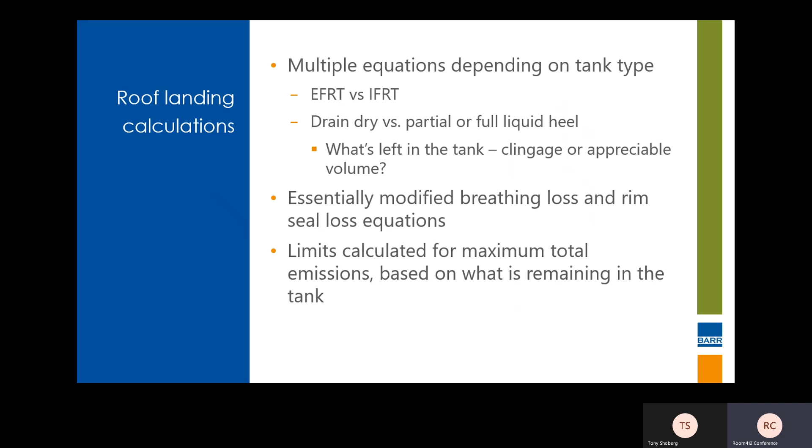Limits calculated for maximum total emissions based on what's remaining in the tank also exist, so you can't over-emit based on what's remaining in your tank. Now, okay, that's a fair point. The limits that are calculated are tremendous compared to what we actually see in terms of actual emissions from those events.

There's kind of two general components to the filling loss. It's a representation of the vapor space below the floating roof being displaced, similar to the fixed roof tank analogous calculations. There's arrival losses, based on the stuff in the tank getting pushed out, as well as generated losses that are driven or created by the new material going into the tank.

If it's gasoline being refilled with gasoline, effectively it's all one thing. But if you have two slightly different products, you effectively look at what was in the tank and then what is being put into the tank through the calculations. Again, saturation factor, tank type, and materials impact the overall emissions for these events.

Again, like I said, AP42 has a laundry list of calculations to go through for the landing and refilling calculations, very similar to the floating or fixed roof tank calculations we already walked through. So we're just keeping this a little more high level.

In terms of important landing and refilling topics, the key variables are the number of days -- how long was your tank on its legs with stuff in it, days or weeks -- what is the volume of the stuff in the tank, and what is the volatility of the material in the tank.

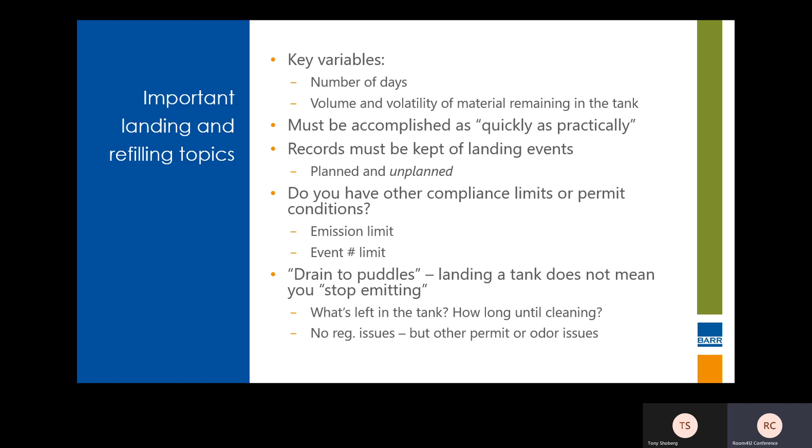Pivoting slightly, but staying in the non-routine category, we get to the cleaning and degassing events, which we've kind of sandwiched those. We land the tank, we pump it out, we're standing idle with some amount of stuff left in the tank. Emissions are generated from that activity. We then transition to the cleaning and degassing, where we have vapor space purges and continued forced ventilation.

A challenge we've seen working with clients to help understand and quantify these emissions is, as we talk with their tanks group and understand what their cleaning plan is, there can be many different cleaning parts, but from an emissions calculation perspective, there are really only two things we're concerned with. One is, how often are they going to use forced ventilation, and when do they turn on and off the fan?

To that point, if a tank is standing idle and it's being cleaned, if people are squeegeeing it out but there's no fan or blowers running, effectively we're still in that standing idle phase - the tank is just open and evaporating to the atmosphere. Once we put on the fans and blowers to assist in that degassing process, then we transition into the cleaning and degassing emission calculations from AP42 phase, where we have to calculate things in this new methodology.

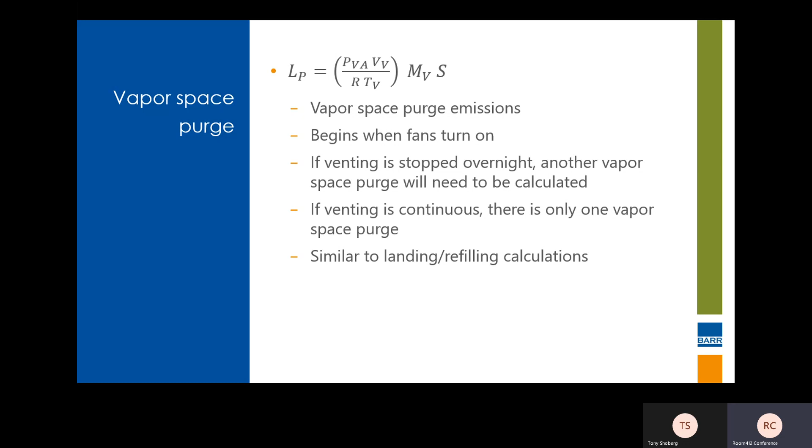Something to consider, though, in all honesty: the equations say you don't count the first half hour or so, because that's the vapor space purge. But when we're at such low concentrations to begin with, or once we get to those tail days where we're at relatively low concentrations, there could be a case to say this vapor space purge isn't really representative of what's happening. I'm just running my fan—when I start it up, here's what's coming out, I'm measuring it, we know it's not super concentrated, let's rely on this as more representative. That's a little different than what's in the text, but it's not an unreasonable approach based on what's actually happening in the tank.

Mm-hmm. Yep. So there's, and yeah, you're right in that if we have actual data and we're monitoring it, why can't we just use that? It's a function of the calculation tools we're given—there's not a lot of guidance. We're learning.

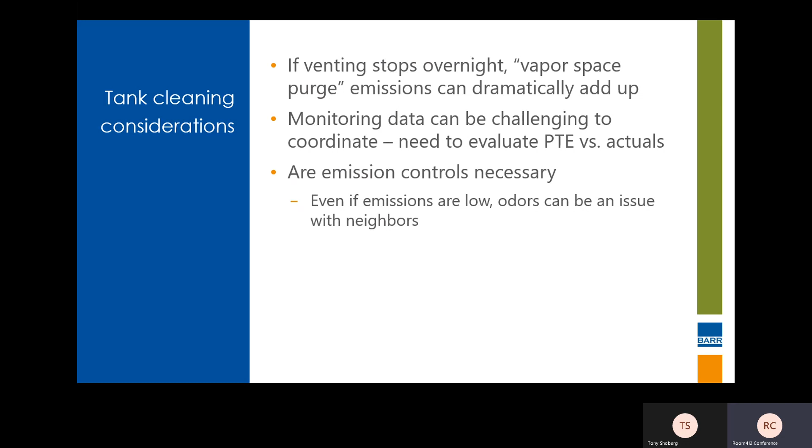We've been primarily focused on volatile organic compounds, the broad emission category from tanks, but we did not want to miss hazardous air pollutant speciation as a general topic. We're talking about generally benzene, toluene, ethylbenzene, xylenes, hexane, 1,2,4-trimethylbenzene—all those fun ones are a speciation or subset of the total VOC emissions.

Speciation details exist in AP-42, with API MPMS documents as well. Again, it's a laundry list of equations to go from your liquid weight percents to your temperature-specific vapor weight calculations. What is the source of your speciation? There are pros and cons for each. SDSs are ubiquitous, available, and have a number, but they're often very high and may not be useful for the accuracy we need for emission inventories or other reporting purposes. They're good for TRI, EPCRA-related programs, but when we're talking crude oil, gasoline, product stream stuff, is an SDS going to have the right level of detail?

I think we typically have not used SDSs for petrochemical stocks, or fuels-related stocks, too often. Typically, we look to industry guidance. There's reasonable data from API and the EPA on speciation profiles generally applied to crude oil, gasoline, et cetera. Or there's always site-specific sampling as well. So having good data, or at least defensible data, is important for the purposes of your hazardous air pollutant calculations.

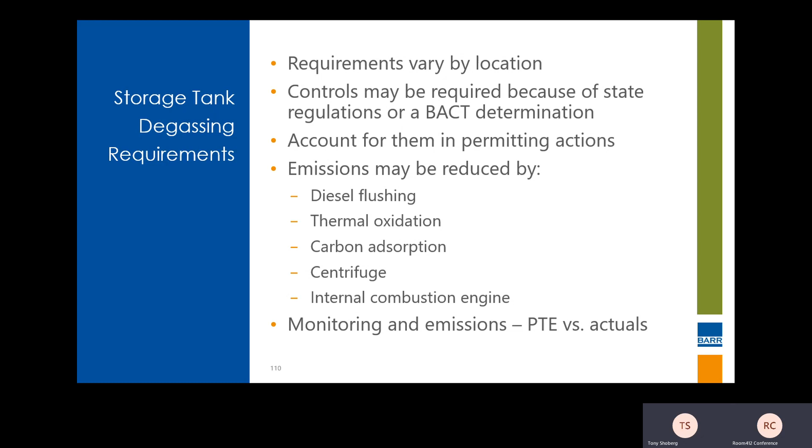Sure, this is a summation of a few points from the previous discussion as well. We want to make sure that for whatever we're doing emission calculations, especially on the permitting and applicability side, we have accurate vapor pressure data. I believe it was Sprague and one other New England company that got substantial $100,000 plus fines and permit violations, or didn't have permits, because of bad vapor pressure coefficients. So just like we do due diligence to make sure our tank deck fitting inventories are accurate and reflective of our process, we want to make sure our vapor pressure coefficients going into the calculations are accurate as well. Otherwise, we're going to get unuseful emission calculations coming out of it.

Tank painting—this has been a curious one for a number of reasons. It can be a significant cost, and there have been clients who, through their engineering and tank group, come back asking, do we really have to paint this tank? And the answer, like any good air quality question, is it depends. I don't think there are any specific federal regulations requiring tank painting at this point. However, there are a number of states that require your tank painted white or some other color, and that can be reason enough to justify tank painting. Or you could have it as a permit condition, again from a BACT determination or some other driver.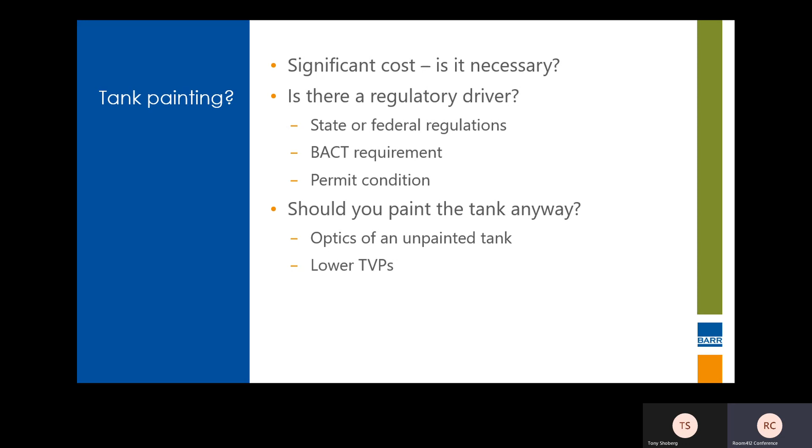Kind of working through these general topics, we've also hit on vacuum breakers pretty significantly throughout. The NSPS KB and MACT WW requirements are that the vacuum breakers are closed unless floating roofs are being landed or filled. Typically, we see mechanically actuated vacuum breakers being the most common technology used, which are pretty easy to fix and maintain. You can adjust them very easily as opposed to the pressure spring actuated pallet style.

But these can become stuck. You can get stuck on high leg settings, even if the rest of the tank is on low legs. You can end up with open vacuum breakers when your tank is at working bottoms, and that's going to create a deviation that you have to deal with because your vacuum breaker has opened when your tank has not been landed. Again, we're talking trivial emissions, but there is concern with a deviation from a specific permit condition.

Another more interesting vacuum breaker based angle is the addition of a vacuum breaker on a tank itself will only result in a handful of pounds of emissions in a given year. However, that's enough to trigger NSPS KB should you not already be subject to it. More importantly, to better understand the full scope of project work, if your facility is wanting to add vacuum breakers to tanks because they were undersized for the current flow rate, that's one thing.

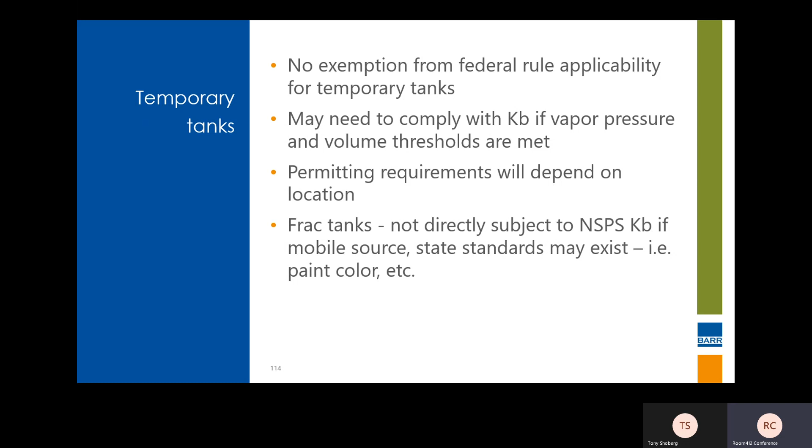Temporary tanks, we've alluded to frac tanks throughout the general presentation here. There's no exemption from federal rule applicability for temporary tanks based on them being temporary in and of themselves. If you don't meet the KB compliance requirements and you're a temporary frac tank, then you're not subject to those rules. But of course, even though you're temporary, you still may have to deal with permitting evaluations and understanding what that project is and how your jurisdiction is going to handle or assess that project before you start.

One interesting thing that we're seeing a lot of folks do in the biofuels world, especially if you're dealing with soy oil or other biogenic-based feedstocks, is using a nitrogen blanket or some other sort of inert gas blanket to mitigate odor issues and potentially preserve product quality. That is, like I said, typically an odor mitigation effort. From an emission calculation perspective...

Presence of an inert atmosphere or blanket on a tank doesn't otherwise impact the AP42 calculations. It seems like it's a little counterintuitive, but we're not talking about tanks that are explicitly closed systems, but rather have a nitrogen blanket, and there is still that exchange of vapor pressure. There's volatilization of material through that blanket, and we still end up with emissions. There's several references from various AP42 guidance that indicate that even if you have an inert blanket on your tank, you don't intrinsically have a reduction or minimization of emissions.

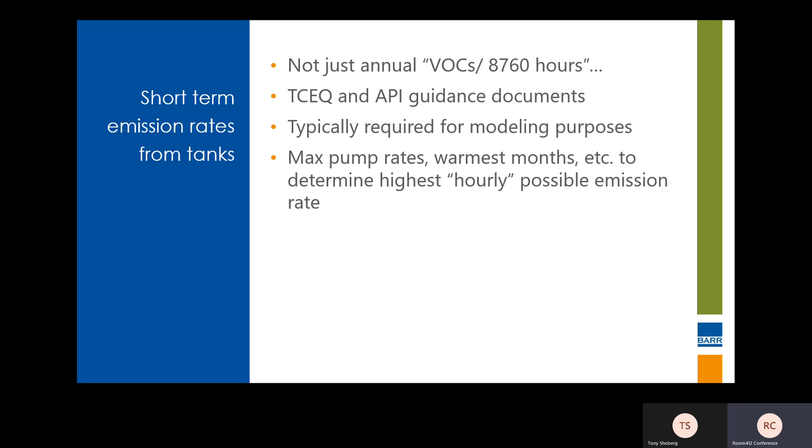Another curious situation we've observed and helped clients investigate: butane and gasoline blending. We've talked about FLIR cameras in our presentation this morning. I'm sure we've all been at industry trade shows or conferences where EPA enforcement and ad hoc inspections driven by optical gas imaging cameras occur, with regulators driving by and taking a look at your tanks.

We had an interesting instance with a client who got a question from a regulator using a FLIR camera to look at some tanks. The general course of action is to have strong records and program compliance demonstration showing your tanks are designed to emit. They will have emissions, but were we floating the roof, filling or emptying the tank such that there was indeed supposed to be more emissions there? We've done our rim seal inspections, everything looks good, we're in compliance. Your optical gas camera hasn't quantified emissions, it's just shown that they're there. That's a pretty traditional approach to that situation.

In this case, what we ended up finding was they were looking at two tanks supposed to have effectively the same RVP material. One was manufactured RVP coming out of the refinery, RVP 10 gasoline. But they were also blending different gasoline with butane to create a blended gasoline. What they were actually seeing was the blended tank apparently had a significantly higher emission rate because the butane wasn't staying entrained in the liquid.

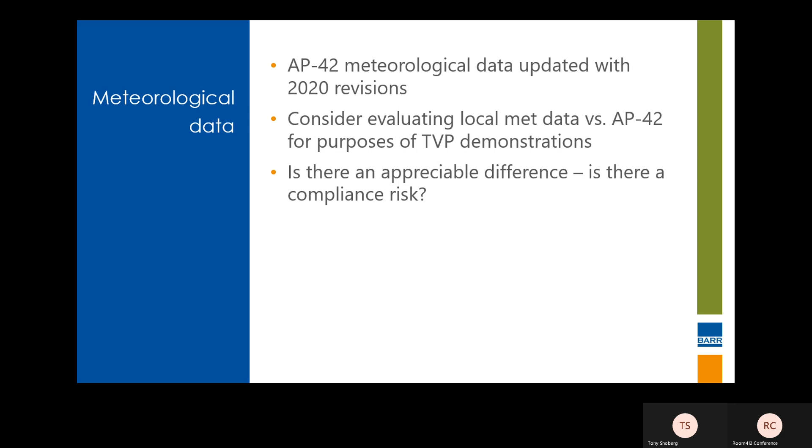So speaking of the EPA, to harken back to emission calculations, last November the EPA issued a reminder about inappropriate use of AP42 emission factors, specifically calling out TANKS 4.09 not being usable anymore, and some specific tank concerns. Tank temperatures - are they really ambient, or do they receive hot stock? That's going to increase your emissions, but really we're concerned about where that puts us from a vapor pressure TVP compliance perspective. And of course, don't rely on defaults.

How many people have had a friend who had a crude terminal permitted with RVP5 crude oil somewhere across the country? Little did they know. So again, defaults are helpful for screening purposes, but when you're actually dealing with your assets, it's definitely not appropriate.

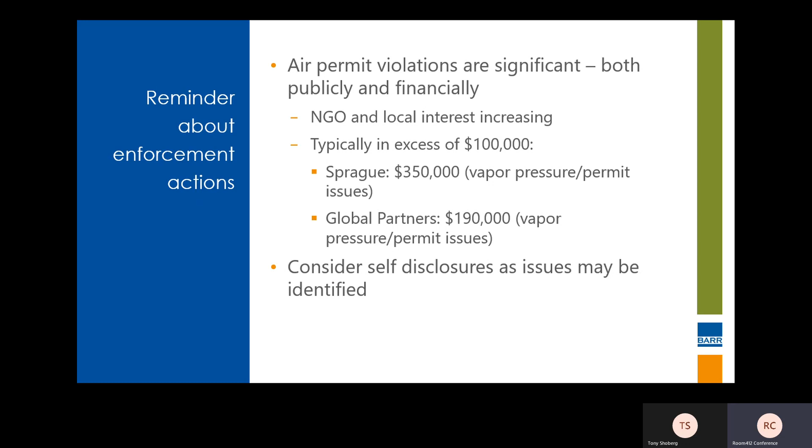The EPA had another more recent report on whether the EPA should conduct more oversight of synthetic minor source permitting to assure adherence to EPA guidance. They looked at a number of natural gas extraction industry synthetic minor source permits from Colorado and Oklahoma, and found that many of the permit limitations did not adhere to the EPA's guidance. Apparently there were a number of facilities permitted with synthetic minor limits that did not have the necessary monitoring, testing, compliance demonstration requirements present that the EPA feels is appropriate for that type of permit. So the states got into a bit of hot water there.

Ultimately, the take home for us is, especially if you have permit limits, what are they? Are you confident and aware of what you have to comply with? How do you demonstrate compliance? Did you feel like when you got your permit you scooted by with a free pass from your state agency, or was it a reasonably developed permit that has the necessary monitoring, record keeping, and compliance demonstration programs built into it? Is there sufficient detail in your permits? Is there a potential at-risk element you may want to consider beefing up for the next renewal?

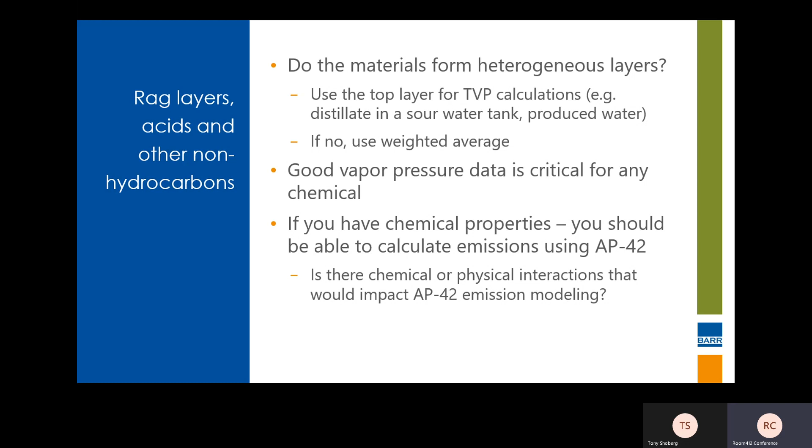And then finally, for this one, we've talked about the API 653 inspections in some passing detail around the drivers for the out-of-service inspections for tanks. This is just a note that the API standards very closely mirror the tank, the NSPS KB inspection standard timelines, but the inspection goals and documentation from a KB-driven inspection versus an API 653 inspection may not capture all of that laundry list of things we need to document.

For air quality compliance, so if you've been historically relying on API 653 inspection data, you may want to either make sure your API provider knows you need a little extra stuff, or you can short circuit that headache and have an environmentally focused inspection, or give them another form specifying exactly what you need for NSPS KB based out-of-service inspections.

And you've already got it halfway done. The glass is half full.

Excellent. No immediate questions from the audience. So I think we're on track to being on or ahead of schedule. As I say that out loud now, we'll see how well I can deliver.

BTECS is a bit of a pun on words for the Barr tank emission calculation spreadsheet, often used to calculate BTEX-based emissions. We developed it as an Excel-based tool to estimate emissions from tanks. When Tanks 4.09 was going to be deprecated and no longer useful, we self-identified the need to have something for ourselves, which turned into a larger, more broadly available tool that we've worked with clients on and provided for industry users to access for free.

In addition to running calculations based on the new methodology, it also has the option to toggle between the old calculation method, so you can do calculation comparisons as we're still at the tail end of the transition period from the old to the new methodology. So it does all the emission calculation stuff we talked about today, from routine emissions to non-routine emissions for fixed and floating roof tanks.

You can, as long as you've got chemical data and it's appropriate to use, enter in any type of VOC material or emissions. It can be customized. The reason we went with Excel versus a formal spreadsheet or software program is that often calculation tools like this are built into other compliance tools. So instead of transferring data from one application to another, by having the working elements built into a spreadsheet, it's easy to add your additional control or compliance demonstration tables, or other things to address your tank calculations in one spot.

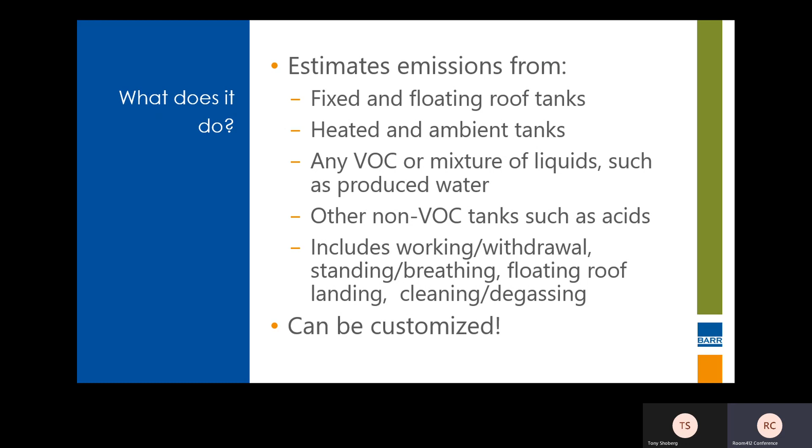I'll pull it up here in a second, but this just kind of steps through some of the stuff. Even though it's in spreadsheet format, we've developed user forms very similar to how Tanks 409 used to look, except we think it's a bit more appropriately laid out to work through your tank information.

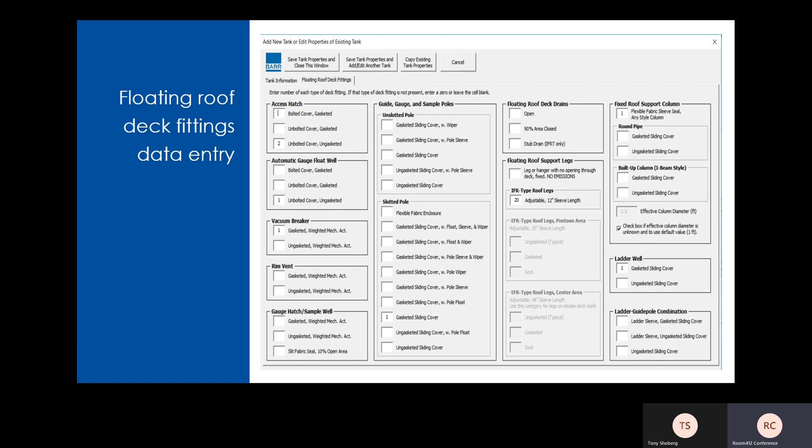And you can enter that in. So you're not entering things in a mile-long spreadsheet row, but rather you get a human readable user interface where you can easily enter information for tank properties and floating roof properties. Historically, when we've made spreadsheets in the past, or seen other tools, it's one column for the 1,700 different deck fittings. This is a more user-friendly format to help get the data entry done accurately and make it easy to look at or reference.

So what it does do is give us user forms for quick reference or quick ability to enter information, to see information, and then it keeps it in a tabularized format, as well as part of that compliance program or deck fitting inventory.

Chemical property information too is laid out in a similar way, where we have essentially the library of chemical materials from AP42, plus you can add things in, you can speciate out components, you can specify whether you're using RVP, a second order polynomial for vapor pressure curves, Clausius-Clapeyron vapor pressure coefficients, Antoine coefficients, or if you have a vapor pressure curve, you can specify that data and fit a curve to it within the program itself.

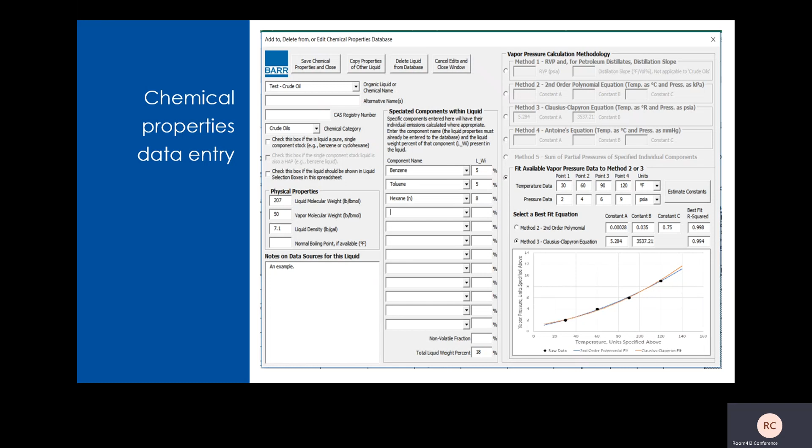And then you enter your other physical properties, add some notes, and again have a more human-interfaceable way to interact with your vapor pressure data. Once you enter it in, it puts it into a tabular format for use in the calculations.

Meteorological data, you can enter site-specific information if you've got it. Otherwise, you can reference met data from the AP42 database. And if you have a mixed bag, or you're trying to figure out using partial data, you can ultimately see what information gets pushed into the calculations here to make sure you end up with the right information.

And then monthly storage tank information. So for each tank you put in, you end up with 12 months of potential data entry. You specify the product, the throughput, you can specify a bulk liquid temperature if you have to, and then that goes into the calculations.

For landing events, whether it's refilling or landing a roof, or refilling a roof, we've got a user form that walks through the process of what was going on with the tank, what happened. Did you have a liquid flush? When did you refill it, or did you not refill it? And that goes through and puts those parameters into the calculation.

Similar to... correct. Yep. Yeah.

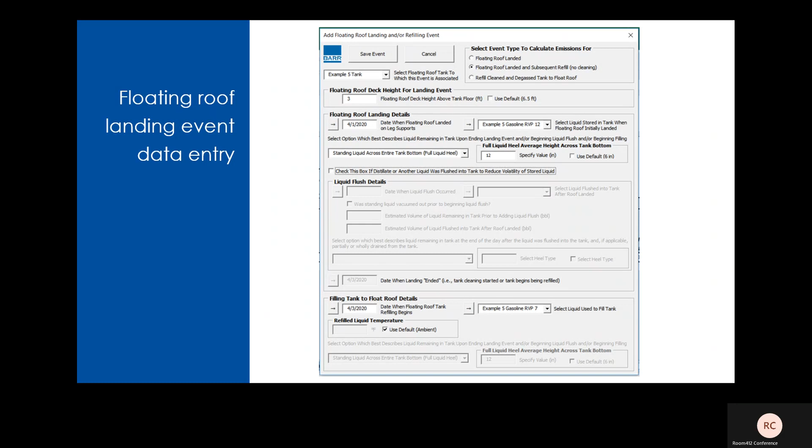Similar for the tank cleaning stuff, we've got again a developed form that you walk through the process. When did your event start? A couple preliminary previously stored product information. And we've got up to 50 days where you can indicate: did you have a vapor space purge, yes or no? What was the heel configuration? What was your ventilation rate, hours per day, concentration, and a couple different parameters to develop the different methods.

Yeah, per event, you can do multiple events up to 50 days. Or should you have something that stretches on, you can essentially daisy chain one event to continue for the next one.

So what about reports? We've gone through all this nice, useful data entry stuff. We talked about how do we verify or validate the emission calculations we're doing. One thing Tanks 409 did good, and that might just be a result of it being the only thing for a long time, is it had pretty good human readable printout tables. When you printed a report out of Tanks 409, you could see the tank properties, the meteorological data, the speciation stuff, and the intermediate calculations that go into calculating our emissions.

We've developed report tables that are pretty similar to the Tanks 409 output, so that for submittal as part of a regulatory package, you have a clean, easy to follow table of tank calculations versus a spreadsheet with buried equations that's difficult to audit or understand. We include intermediate calculations for both routine and non-routine emissions, so we have detailed tables for all of the emission calculations.

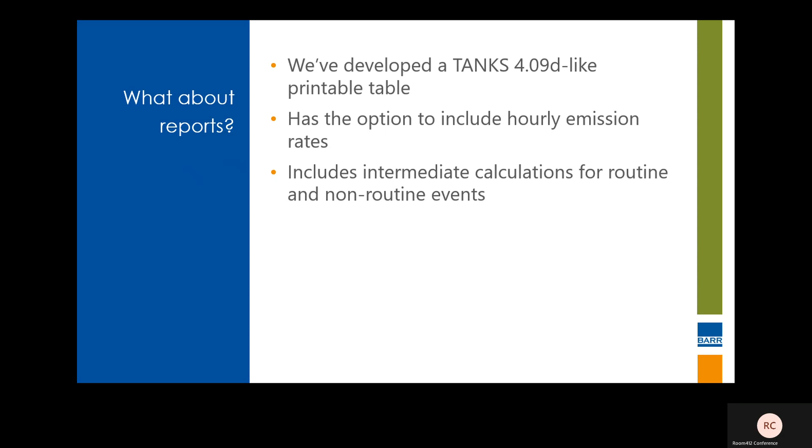Ooh, we may have a challenge here. We have the capability. So unfortunately, the technical capabilities of the Excel version will not run on this computer. I could, and I will, but with Tony on the call and the recording happening... Okay, well, Tony had dropped. In that case, maybe what I can do is shut down the Teams call here, and for those curious to check out the spreadsheet, I can do a quick demo and call it good.

So, in closing, we've covered all the good stuff. Our key takeaways — I've belabored these points all day — pay attention to the details, pay attention to when you're changing stuff on your tank, pay attention to your calculations. Incorporate cleaning and degassing into your emission inventories and permitting. Understand what your regulatory burden is and what your permits say. Make sure you've got the folks responsible for compliance on top of that stuff. And be aware of changes, whether it's a regulatory basis, local issues, or even facility operational changes that could impact your vapor pressure or emissions.